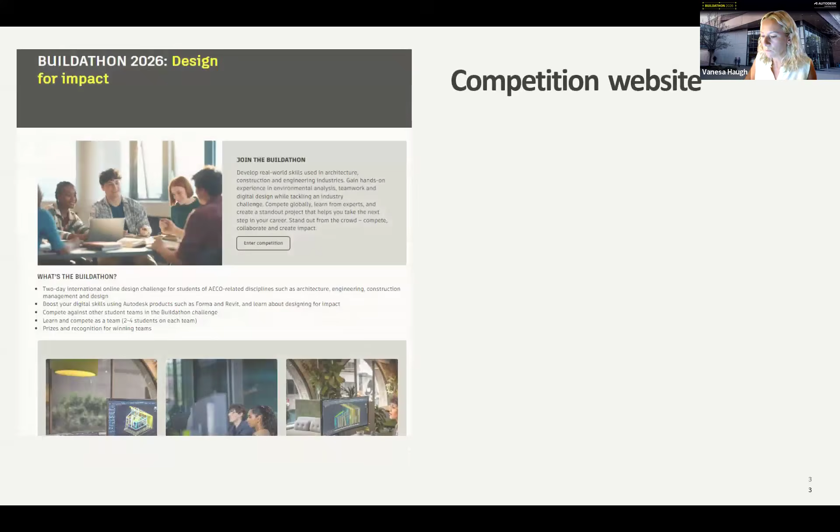To support you in that, we have a designated Buildathon website. This is where you've already registered, but please keep coming back because we have a news section where we're updating news in relation to the Buildathon. We have global training dates posted on a regular basis, and this is the first of quite a few different live sessions. There are different languages happening across the world.

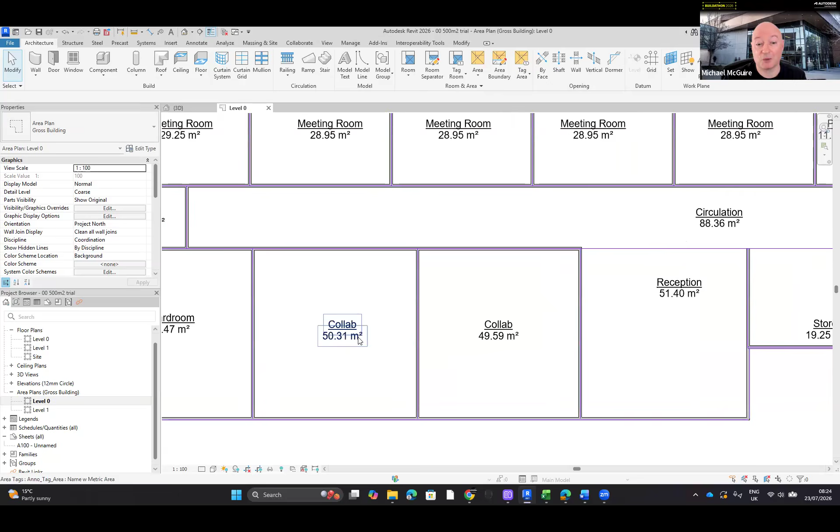I can't fit in any other rooms because it will go bigger than 600 square meters. Each of the spaces that are here must be maximum the space size that you were allowed. So we can start to look at this space here, for example, and say actually the maximum I'm allowed for a collaboration space is 50 square meters. Do you see? So this wouldn't do, okay?

So you are allowed to be smaller than these area sizes that you're given. We can start to work with our models and change the spaces so that they're exactly 50 — that would be perfect. They're allowed to be smaller than 50.

The last tip I'll give before we move on and look at some of the other iterations of how I've developed and shaped some of the spaces: the bigger the building that you can achieve, the more photovoltaic solar energy you can generate. So if you're allowed 600 square meters of a building footprint, you may want to use all 600 square meters as best you can. But what you can't do is leave huge amounts of space that are not being used.

So here, for example, behind the store is about the correct size. But what we can't do is say, well, I want to make the store twice as big, and maybe extend it out to here so it's a nice big building — you can't do that. Each space has to be the size required that's specified in the brief, or smaller.

I will reiterate, this is the part that will probably take the most amount of time. Take your time to figure out the best arrangement for spaces. There are judges who will judge on architectural layout and design. So yes, there are prizes for the best photovoltaic or solar energy, the best daylight, the best response to the site — lots of things to look at — but also how you arrange the spaces.

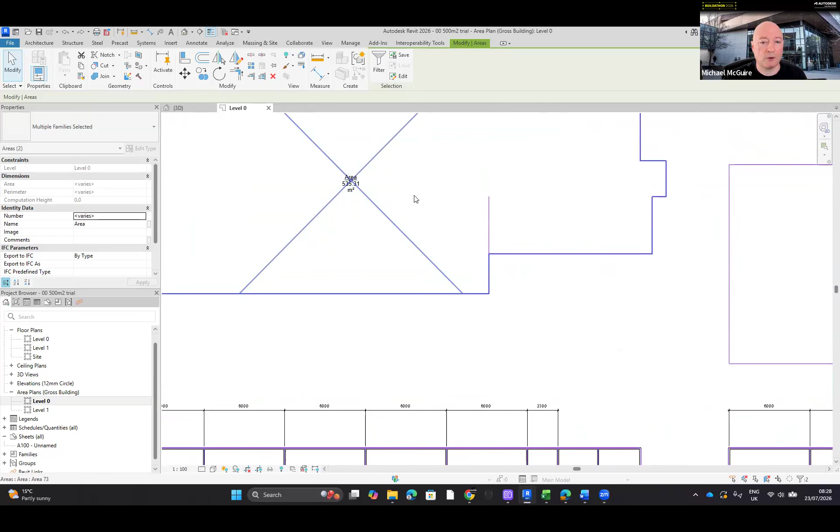You'll notice the other thing I was able to do if I create my concepts like this is I can bring out the perimeter of the building and add and check the area. So if I'm allowed 600 square meters, this building uses 535.31. We can look here, it's 513. We can look here, it's 499.

So we've got less area used on the building footprint on the ground floor. We still have lots more spaces to add, but I thought I'd go over the whole process of how I was tackling something like this, and hopefully if you're new to Revit or haven't used area plans before, that will allow you to follow along and achieve something similar.

Okay, so I won't save. I'm going to start with a completely brand new architectural file, so we'll just go with the default standard template. And there we go - obviously within Revit, we have the ribbon at the top.

Hopefully people are familiar with that, but if not, this is where you're going to find the tools we need. So we've got the architecture tab, we'll be using the wall tool for example, we'll be using the area plan tools that are here in a bit. All of these will open up once we begin the area plan. We have the properties palette here, so if we want to change the properties of anything, and then the project browser.

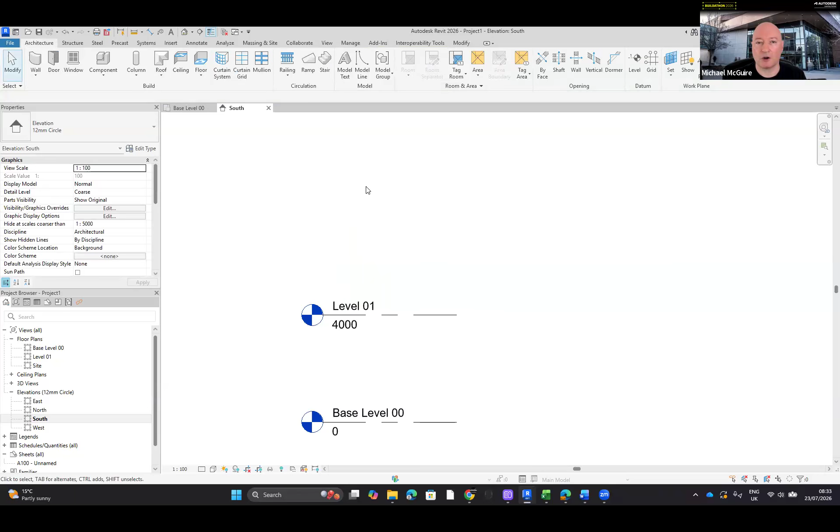If I click on that, my cursor just changed to a little crosshair. If I press escape a minute to show you, my cursor is currently the modify tool, and it's looking for me to click and select something. But if I come back over to datum and click level, then I can create and add new levels myself.

So let's go roughly about here, and you'll notice a little green dashed extension line. If I click when I see that, and then move along to the right-hand side, we'll see that little green dashed extension line again. I can click to drop the level, so we've got level 02.

Revit's very clever in that, because the last one I called level 01, it will call it level 02. It doesn't know that the next one I actually need is going to be the roof, so it thinks it's going to be level 03.

So if we go back and click in this little area here where it's locked with the green extension dash, just one click, not clicking and holding the mouse. And then we can come along to the right-hand side, and again when we see that, we can click.

Then escape twice. I press escape twice because the first time, it stops looking to just create a level, but the level tool remains active. The second escape brings up the modify tool. So we can say level 0, base level, level 1, level 2, and this one, if I click on it one time and then click again, it should be called roof level. There we go, so we can create the levels for the concepts.

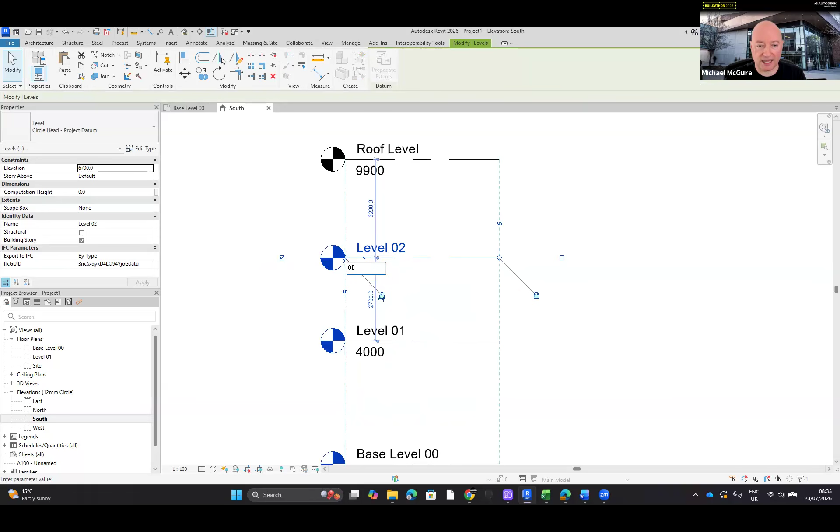If I click on that, instead of clicking to change the name, it's already blue, so I can click to change its elevation height. Maybe we want 8,000. So we've got 4 meters, or do we want the ground level to be 4 meters, but every other level to be 3 maybe? Then we can make it 7 meters.

And then with the roof, we'll say 10 meters, so 10,000. Okay, so we have the base level, level 1, level 2, and a roof level.

But what you'll notice is, hopefully, the base level is blue, level 1 is blue, but level 2 and roof are black and white. That's indicating that they don't yet exist as a floor plan view, so they don't exist in here yet. We can't open the view, we can't actually go in and create anything with it.

So to create that, I'm going to go up onto the ribbon, onto the View tab, onto the Create panel, and you'll see Plan Views. I'll click Plan Views, and you can ask for a floor plan view.

And then here, you'll see the two views. I'm going to hold in Control on my keyboard and select both, which allows me to say OK, and it will create two new views in here.

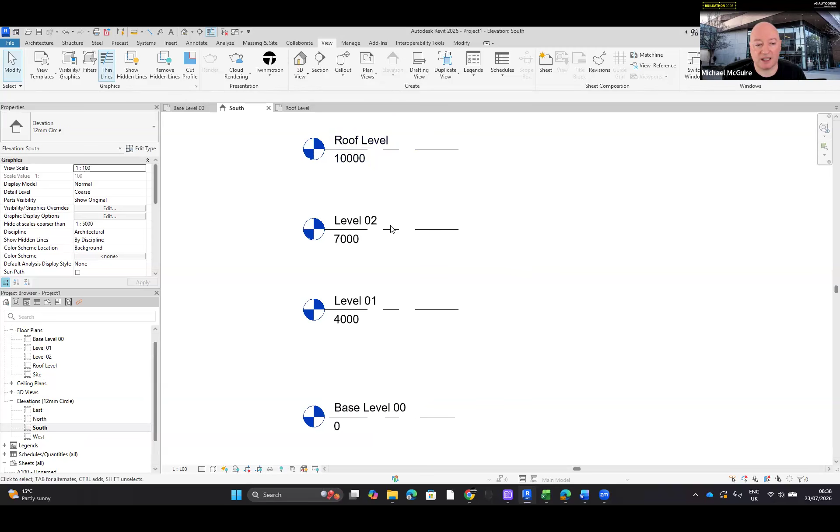To begin creating the concept, once you've worked out some different areas that you want on the ground floor, let's look back at this spreadsheet a second. If I think about how I've done it, I'm starting to think of moving some of these spaces to the ground floor instead of the upper floor. But the reception is in this group, so I obviously want the reception on the ground floor. I might want to put some of the private offices on the ground floor as well. A plant room, I imagine, might go on the ground floor.

It doesn't need to - you can come up with another reason why. But if I put the plant room on the ground floor and so on, once you start to see these totals add up, remember you've also got circulation space. So if I had a limit of 500 square meters, I'm going to say my limit for this is 600, but that will only give me 100 square meters of circulation space - the corridors, the hallways. So try not to get super close to the maximum for each level. How I've divided it up right now, if I make all the rooms the exact size they should be, then I end up with 500 on one level, but only 240 on another level, and maybe 400 square meters on another.

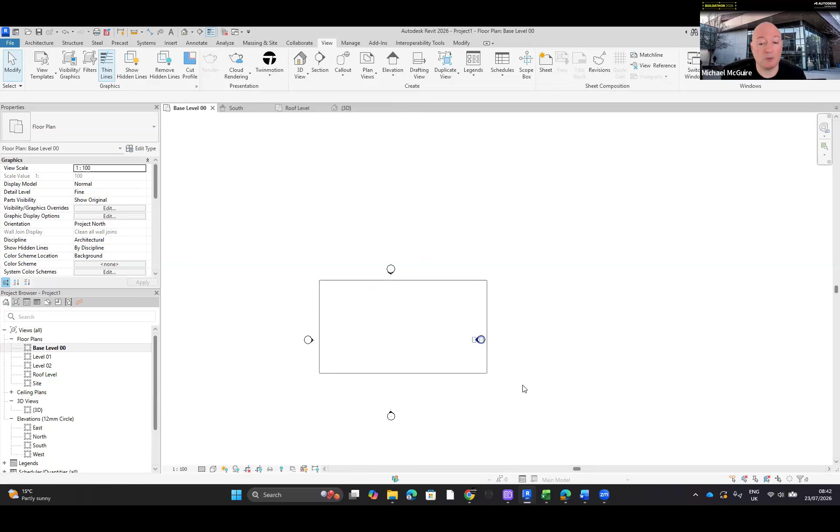So in the floor plans, base level 00, we can double click that. A floor plan view is looking straight down on the building, like a bird's eye view. So we have level 00 open - anything we create right now would be on the ground floor, the base level. If I've completed those rooms and want to create something on another level, I would double click that level, and the view hardly seems to change much, but we're now looking at the level above the ground floor. Or we can open up the roof, whatever that might be. So bear in mind, in your floor plan views, which level you're currently working on. There are a couple of ways to look at this and do this.

This is the way I prefer, and I'm going to show you a couple of methods. You can decide which is better for you. We can start off with creating some walls.

So if we said 500 square meters, for example, I'll do this in two steps. I'm going to do this first and then delete it and show you again why. If I click the wall tool on the architecture tab, build panel, wall, it doesn't matter which walls you use. With this standard template came all of these different types of walls, but it doesn't matter because at this point it's just a concept.

We could even use something like one of the partition walls, or the external wall that has brick on the outside, or one that's purely brick or block work. You can use any of these walls at this point. To keep it simple, I'm not going to use one with lots of different elements like brickwork and plasterboard. I'm going to choose wall external, which is only brick, and attempt this outside this view currently.

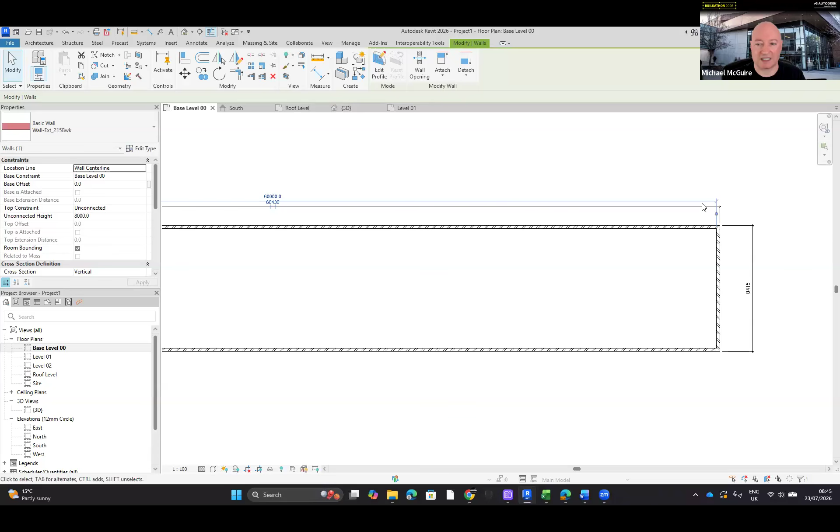So if I choose a wall and edit this dimension to 60 - 60 meters, not 60 millimeters, let's try that again - then we get the 60 meters. If I click here, I can move this one and say 10 meters. So from the outside, 60 meters times 10 meters means this building is 600 square meters. We cannot be bigger than that.

So for this example, I would like to limit you to 600 square meters and be able to add in all of these rooms and circulation. This will be the experiment - this is a good trial.

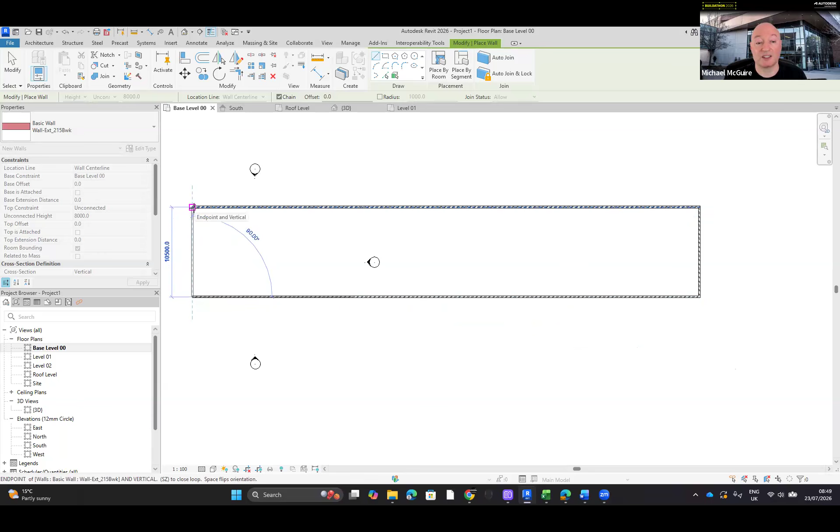Similarly to when we created the levels, a little green dashed extension appears. I can click one time there, and then to finish, I'm going back to where I started and clicking one time. Remember with Revit, you have to press escape twice - once because it's maybe trying to draw a wall, the cursor stays a little crosshair, and I'll press escape a second time.

So we have something roughly like what I would like it to look like. But this little elevation marker is inside the building, hence why I draw this outside normally. What you can do is, as long as you have the modify tool, the little arrow that's there, you can drag over the top of that. If you put your mouse on it, it automatically defaults to move, and you can drag it to the outside of the building where it really should be.

So what about size? How do we check that things are the correct size? Nice and slow so you can follow, whether it's being recorded or you're watching the recording. On the ribbon, on the Annotate tab and the Dimension panel, always use aligned dimension for this. So if we click aligned...

By default, up here will be set to wall center line. So if you measure your building from center to center, and then you changed it to 60, as you see when we drew it, it was 60 meters. The building is actually slightly bigger than that. So when we go to annotate dimension and choose aligned, you might want to use this - choose the wall face. What the wall face allows you to do is dimension from this external face of the building all the way to this external face of the building.

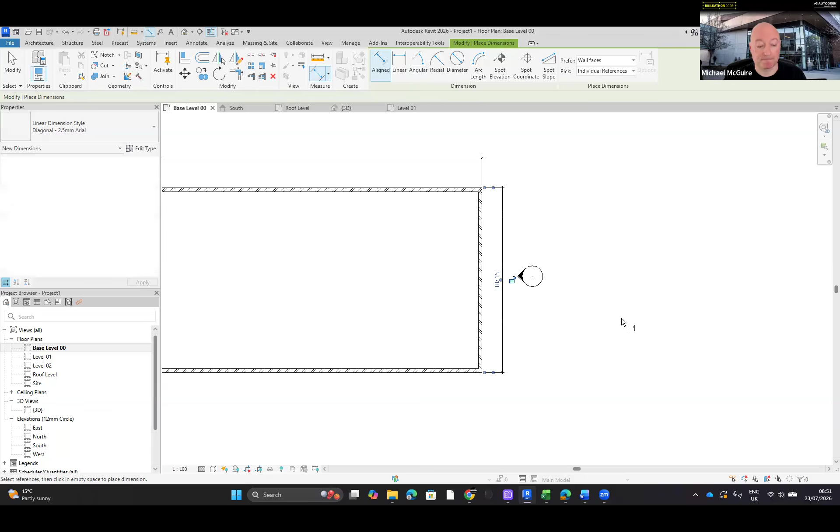So I've clicked those two locations. Now what Revit is asking me is, where do you want to drop the dimension? So a third click is needed to drop the dimension. If I repeat that, you'll notice the dimension tool is still on - it's got a little dimension symbol beside the cursor, and wall faces are still active. So we can choose the exterior two faces, and for the third click, we can drop the dimension. And when you're done, two escapes again.

The number one thing that I find students who are new to Revit do is they try to change this value by clicking on the value. That might happen to you, and if you see this pop up, what you don't do is replace it and change it. What you want to do in Revit - if I zoom out, and we'll change to something like... oh, we went the wrong way. We'll change it to something like 1. There we go, so you can see the dimensions quite clearly on screen. Aesthetically this looks terrible, but just so you can see the dimensions - to make this say 60 meters, you need to move this wall or this wall.

If this dimension is black, it's telling you what the dimension is - it's not editable. But if I select this wall, the dimension turns blue, so we can see that dimension is there. If I click this wall, Revit has been a little bit of an issue - it's showing me a temporary dimension also. So let me just delete this and show you what it's doing.

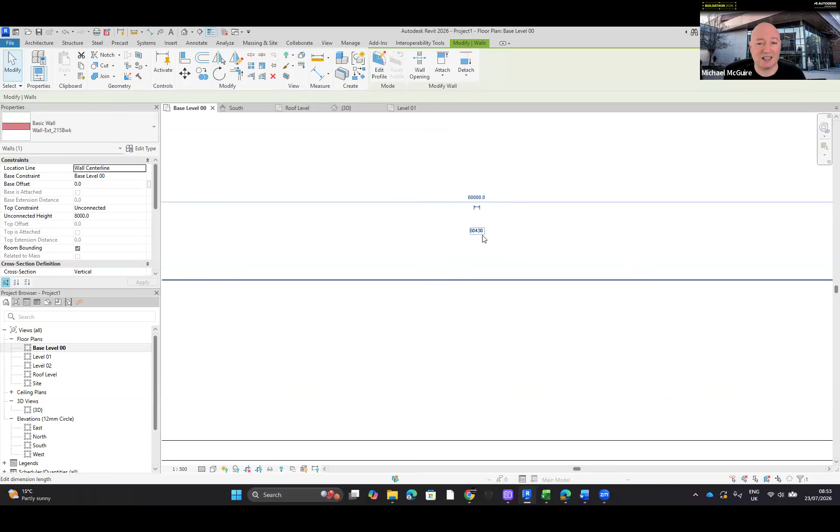So if I click a wall, Revit automatically shows you a little temporary dimension, and you can tell it's temporary with this little symbol that's here. If I bring mine back, it doesn't have that symbol, so it's a permanent or fixed dimension. Be very careful with temporary dimensions, because the temporary dimension is coming from the inside face. So if you make that say 60 meters, the building itself is actually 60 meters, 430 long. Be very careful and make sure you zoom in and click the correct dimension - we'll say 60 meters, so 60,000 millimeters.

And then I want to make this one change as well. Okay, so 10 meters, 715. I want it to say 10 meters. This is the wall that I need to move, or this wall. Those coming from AutoCAD might assume that this is the wall you click, because this is the length in AutoCAD. It would be the length of this wall.

Remember what we did in the dimensions? We made it the dimension from the outside of one face to the other. So what we're doing is actually moving the outside of this face to 10 meters. So if I say 10 meters, now I'll change this back.

Let's change the scale, so the view scale, so that the dimensions and everything look a little bit better. But it's now 60 meters by 10 meters, for example. Okay, so that would be one. That's a good example of it.

Within this space now, you can start to populate your rooms as you have them. Okay, 60 meters by 10 meters might work. You can use a calculator and check what else might give me. So if we said 50 meters, what depth might that allow me to have? And so on.

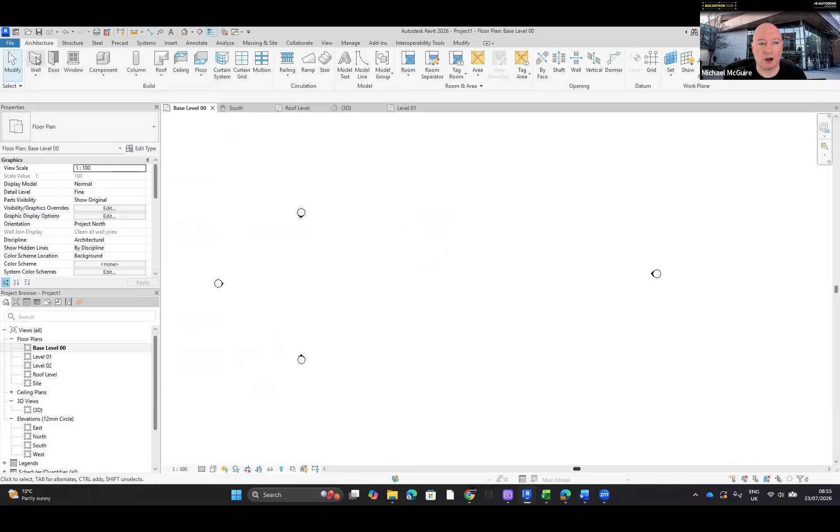Okay, so here's how I would tackle that. So we've already got our elevation set up, and we now know how to draw in some walls and how to add some dimensions, so we might start. So, architecture, we'll look to the build panel and we'll say wall. And then let's, instead of saying exactly that footprint, I've already worked out what my spaces might be in this spreadsheet here.

Okay, so I think I need a reception that's 7 meters by 7 meters. I need 5 breakout rooms. They are 5 meters by 6 meters approximately, and so on and so on.

Okay, so I'm going to try and recreate them as that little sketch that I've created. And then one of your challenges as you practice might be to make a better space than me. How's that? See if we can make a better space than what I make here right today. So we've got these little breakout spaces.

So we start with these. We'll say, I had in my head, as this space worked, I had something like this. Okay, so when I was thinking of this and I sketched it out, I was thinking of maybe some meeting rooms along here. So a reception in this area, a corridor hallway, as you saw.

So we'll go 1, 2, 3. I think we had 5 meeting rooms that we need. So if I thought of putting them all together, 1, 2, 3, 4, 5. So there are those meeting rooms. We're going to have something like a staircase at this end. Possibly, if it fits, we want a boardroom here.

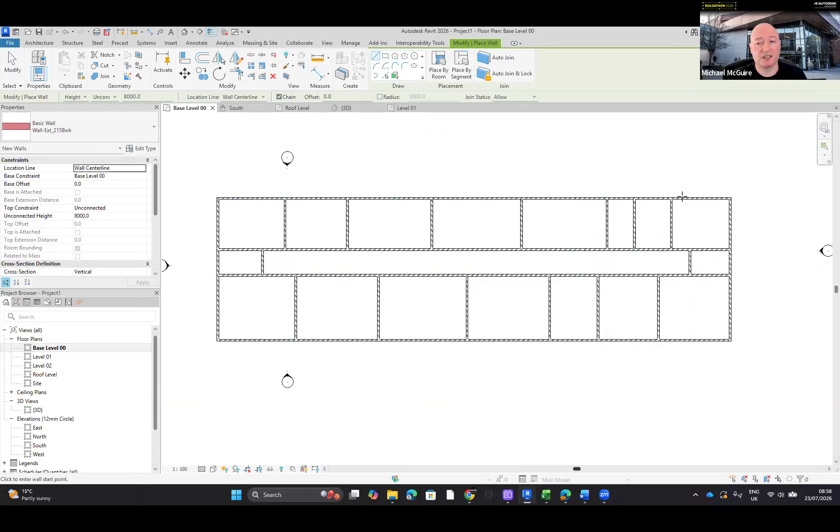We have 2 things to work out. One is going to be the perimeter, the area of the building, the overall area of the building, but we also want to work out the area of each of the spaces. So if we get that correct on the left and we work along, what you'll remember from my sketch is this looked, it kind of stepped in a little bit around the building here. So we might need to change some of that, how it fits around this area here. Okay, and the way we check that is we'll end up creating something of an area plan.

This is my idea of how it will work. I'm thinking already of daylight coming in from all of the spaces. What I haven't created is a room here, because you won't get any daylight into this space. So I'm already thinking of big windows, lots of daylight.

Maybe on the south, if you're in a warm country, you don't want huge big windows. Being in Scotland, I would quite like large windows here on the south, lots of light coming in.

Something else that's maybe not great design would be a corridor that goes to nowhere. This costs a lot of money to build. We have a corridor here, and then maybe it's an escape entrance. This would work. But what if we have a staircase, and we have a door here going in and a door coming in here and so on? So these might work as spaces for me.

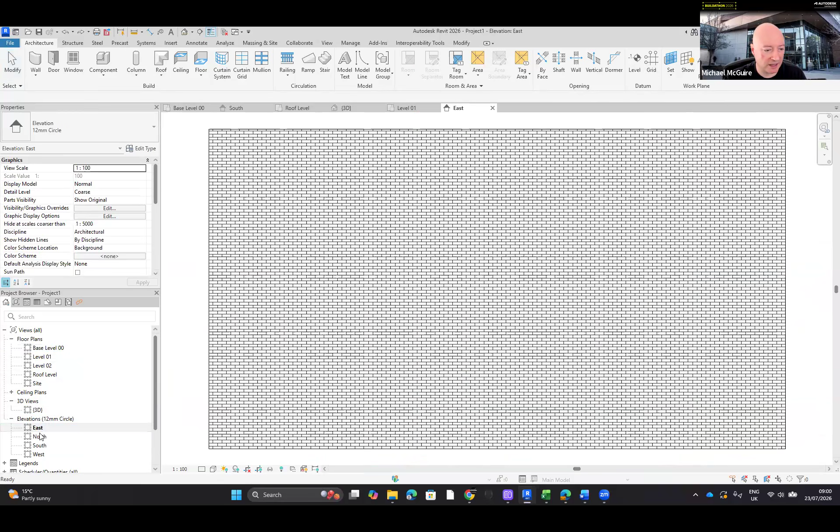We can go back to the level, and go to the elevations. Let's go to south. There we go, and we can see that the building currently is too high. We'll deal with that. It's way too high - it should only go up to level 1 that's here.

Back to that 3D view. What we want to do is pick up all of the walls we have created so far. So we can pick up one, and then if I right click on that, I can select all instances, either in the view, everything I can see, or the project. You'll notice it picks up all of the walls that are here.

This is where the properties help. We have a location, which is the base constraint, on level 00, where we thought it should be. The top is unconstrained and 8 meters high. So what we want to say is the top of these walls should go to the level above that we're currently working on - so level 1.

Then say apply, and now this is the ground floor - or it might be the ground floor, we'll see if it fits. Going back to our base level, we can see how that might look. I would be really happy with that, but what we haven't done is check the area of that.

Something to pay attention to in your views is there's a type of view missing until you tell Revit that you want to do it. This is going to be called an area plan. We can look at the ribbon, the architecture tab, room and area, and then this little drop down for area, we can tell it we want to create an area plan. Then it asks which views you want an area plan for. You can select all of the views and say OK.

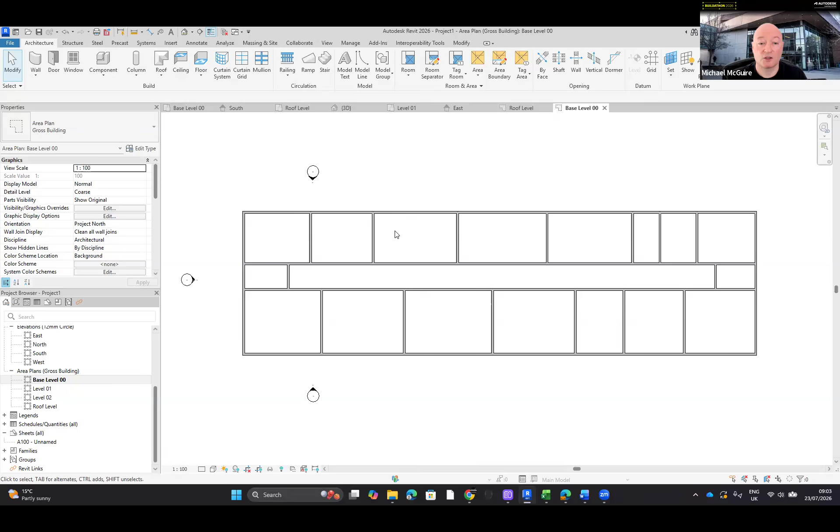I've now got a new section. Where before we were working in the floor plans, we can see that here - I've now got a new section called area plans. If we open up the base level, we should see our building that we already created. So anything I do to this building here, if I edit the walls, will also happen in this view and will also happen in this view. If I deleted this wall, it will delete from all of the views. But something really special the area plans show that the other views don't are the areas of your building.

So let's create them - let's start with them. We've already created the area plan. To create an area, we need to define what a boundary might be.

So if I click area boundary, there are two ways to do this. You can automatically click on a wall and it will select the middle of the wall. That's fine if you want to do that. You'll see that the area boundary sits in the middle of the wall. If I undo that, another way to do it is by using the sketch and draw tools that are here.

So you can create it using something like the rectangle tool, and if we zoom in, we can click exactly the right space. I'll just change this little setting, the thin line setting, so that you can see that on the screen. That defines the area of that room.

So I can now add in, if I go and click here, area, and I choose area, then I can add an area to that space. You notice I can't add an area to any other space, right?

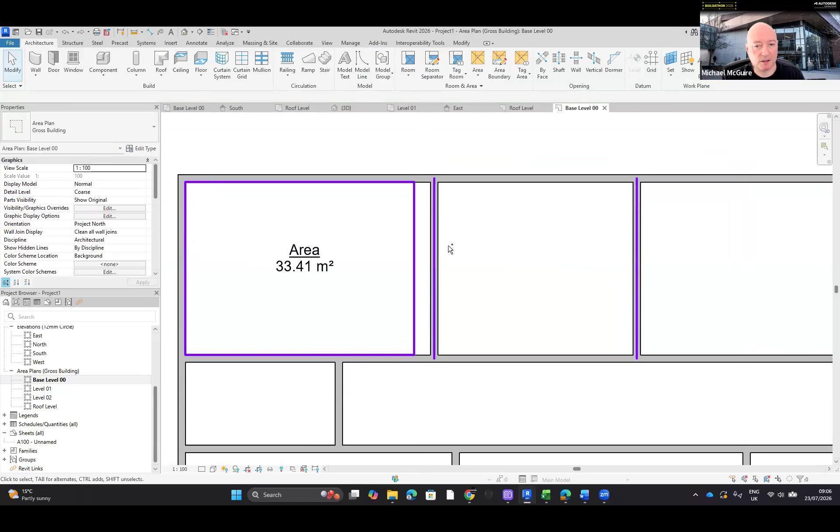So you have a choice of how you're going to attempt to create your spaces. We can look at moving with just a click on the boundary. So if I click that boundary, I can move it until it gets to 30 meters or just under, and then we can start to bring the walls across to where they meet.

To align different tools, we'll notice on the ribbon, if I select something, it changes to the Modify tab, and here is the Align button. I'll click Align, and I'll click maybe this area boundary, and then the face of the wall, and the wall will move. So the first thing you click is going to actually stay where it should be. So you can see how that works.

I might delete that, and we'll try that again. So just to show you why I might like to use the draw it yourself method - so when we go to area boundary...

I've got it set on the pick lines tool, so we can pick all of these lines as we go along. We'll pick this one, we'll do along here. Okay, so we've still got these ones to do on the outside here.

I might like to draw these ones in myself because what I don't want is to draw in the middle of the wall. I would like to draw on the outside of the wall because the outside is actually my building footprint. So using that rectangle tool, the little sketch that's there, I know that I've drawn on the outside of that.

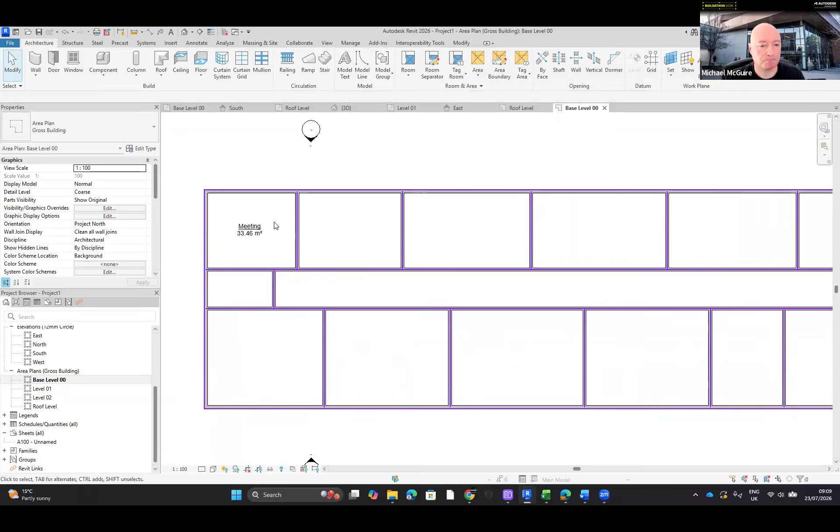So for here, if I click the same as the level, if I click on it once and then click on its name, we can call it meeting - so this is going to be one of the meeting rooms, for example. And then we'll click area, and I'll choose area, and we can start to position them all in here. So let's pick that meeting area, so we can position each of these this way.

You'll notice everything is going yellow. What you should not have in any of your building is any empty space like that. So we need an area, and we need to name it and tell it what it might be.

So if I was to name each of these spaces, it's a meeting room, it's a meeting room. You can call it meeting 1, meeting 2, meeting 3, meeting 4, meeting 5 if you really want, or you can put in the room numbers. These others for me were going to be something like a print room, a server, and then a couple of offices that I needed. This was the staircase, we've got circulation, it's here. This was the other office.

So there were 3 offices and 5 meeting rooms in this spreadsheet as I had it. So from my sketch, this would be the reception. We had a collaboration or an open space, an open space. And then along here I had a boardroom, and then the other stair.

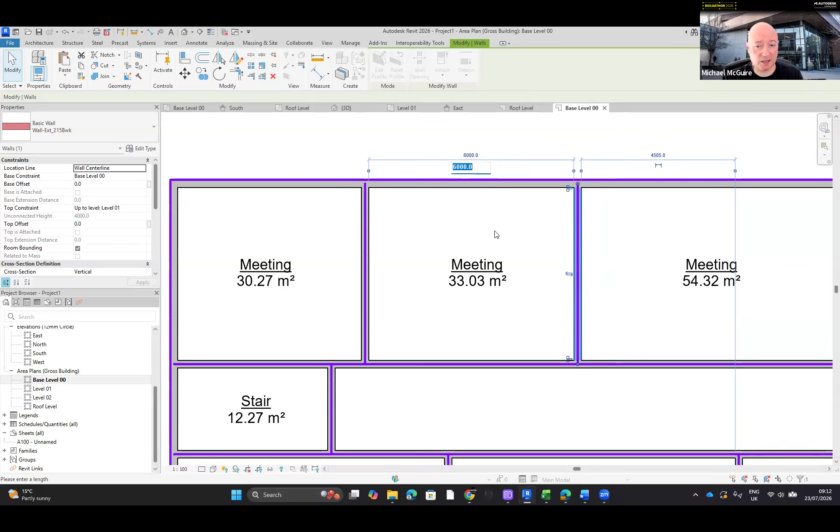This is much easier to do it this way, because if you move the wall, it automatically changes the boundary, as we see. The other way I was showing you to do it - I'm just going to delete a couple of these boundaries a minute - is if you do the area boundary and you draw the space exactly in the room yourself, you get the area exactly the size of that room.

So if we pick this up, I'm going to delete that little boundary it didn't like, and I'm just going to start to create them myself. So area boundary, I'll choose the rectangle tool and draw that in exactly myself. If you want to do it that way, I recommend that you add dimensions.

Exactly as we did before, on the ribbon in the Annotate tab and the Dimension panel, aligned, and make sure we've got wall faces. But what you want to dimension is the inside of the room. So if you know that you want a room 7 meters, we'll click this wall and make this 7 meters. Or if you know it's going to be 6 meters this way, but this way should be 7 - you see, if I click this wall and change this to 7 meters, then that wall changes.

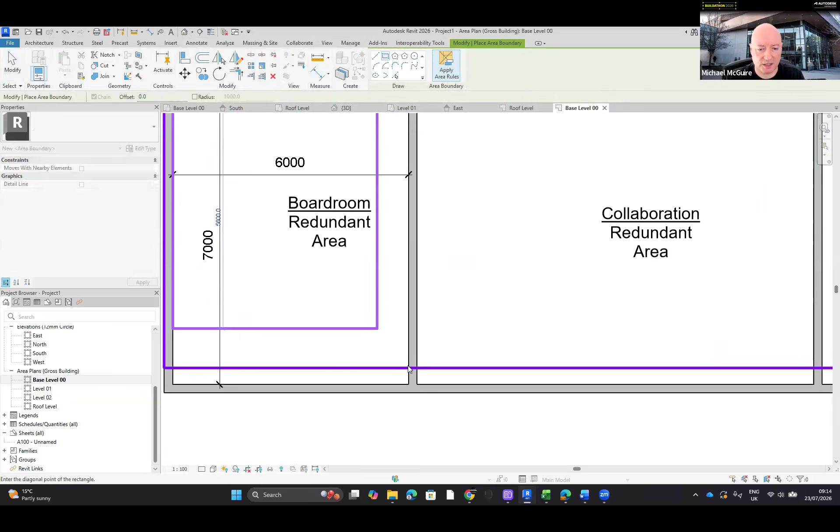I'll go back through then and we'll just add an area boundary into this space, and then this space, and we need to fix the ones that are there. So you can see how that would take a bit more time. I don't need this one, for example, that's here - we can bring that along to here just now, and I would fix all of these spaces that are now going to be broken. We'd need to go along and fix each of them as well.

So that's how you work out your concepts. Once you have each of the rooms the size you need them to be - if we're looking for 30 meters, I'll just very roughly do this. This might be an early trial at a concept, so 30, 30. Let's bring these along to where they might sit.

So no spaces can be bigger than 30 meters. We'll allow a tiny little tolerance, but if this is just a trial and an early concept design trial for me, I'm going to pick up each of the walls and just move them so that the spaces are approximately the right size at this point.

Once you have all of the spaces the right size, we've got quite a big bit of space over here as well, this huge big meeting space. But once you have all of the spaces the right size, what you'll start to find is down here, it won't work perfectly.

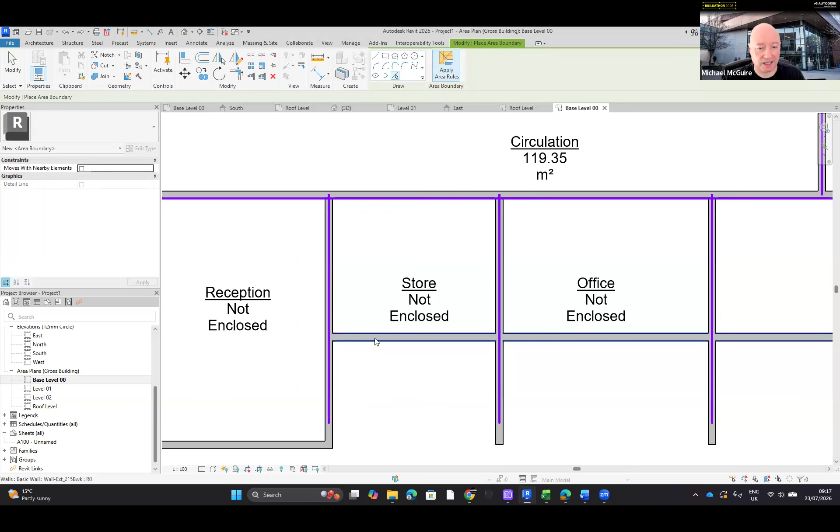So if we change that and pick this wall, it now knows that this is a boundary for this area here.

So again, checking your spreadsheet, looking at what sizes everything needs to be. If these are the correct size, great. If it's too big, then you'll need to reduce the size. However we need to do that.

Same, I'm going to pick up - need to hit escape, I'm putting too many boundaries on. There we go. So we'll pick up this wall and the little blue dot, we'll move that one back. This wall, the little blue dot, and move that one back.

I'll show you why. If we go to 3D, so we'll look at 3D in here. Currently, as the building stands, we've drawn too tall, but we've got these fins to the side of the building that we're not needing. These are not outside rooms, so we need to fix that.

And all we're going to do is drag these back. So a nice, early, very rough concept, okay? Once you have those very early rough concepts, you can start to look at the dimensions of the building overall. We've got these to fix as well.

Yep, there we go. And we can do the same with the boundary as well, so you'll notice if you select it, you can just move it back. We've got a little spare extra one in there I can delete. Region not enclosed, so we still have some boundary we need along here. So if we do each individual room, or we just drag these along, however it might work.

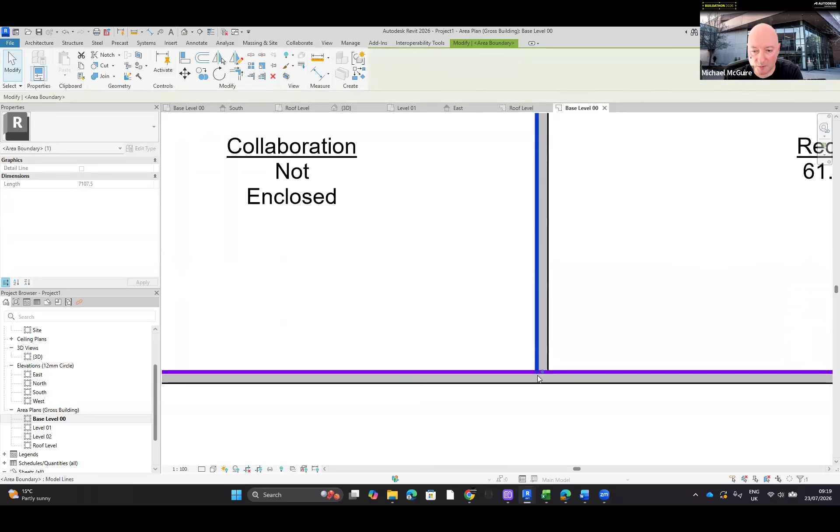So it must be here. Not enclosed, that one's the wrong one. There we go, so let me just add that. Oh, it's not picked up that space.

So what we might end up doing with this space in here, we can look to - let's go find, so we've got the boardroom, we've got the collaboration, so it must be along the top somewhere, there'll be a little gap or something. So we can delete that and then just re-add that in.

So area boundary, pick up the spaces. Oh, it hasn't done it. Let's do it manually then, because I dragged this one along, I think, just trying to cut some time.

So we'll do architecture, area boundary, and it's just a little sketch of the room. So we just draw in and delete this one first. What we can't have is any of these boundary lines sitting in exactly the same place. There we go, there's that reception as well.

So what I can't do - we can pick the inside of the wall here, but what you shouldn't do is put two on top of each other that run parallel to each other. So we can do that. There we go, and then the same thing for the storeroom and some of the other rooms that are there as well.

So just pick the inside corner and the inside corner, and do that for each of the spaces that say they're not enclosed. There's two ways to do it, whichever suits you better: you either draw in each of the rectangles yourself, or you automatically select them using the Pick Lines tool.

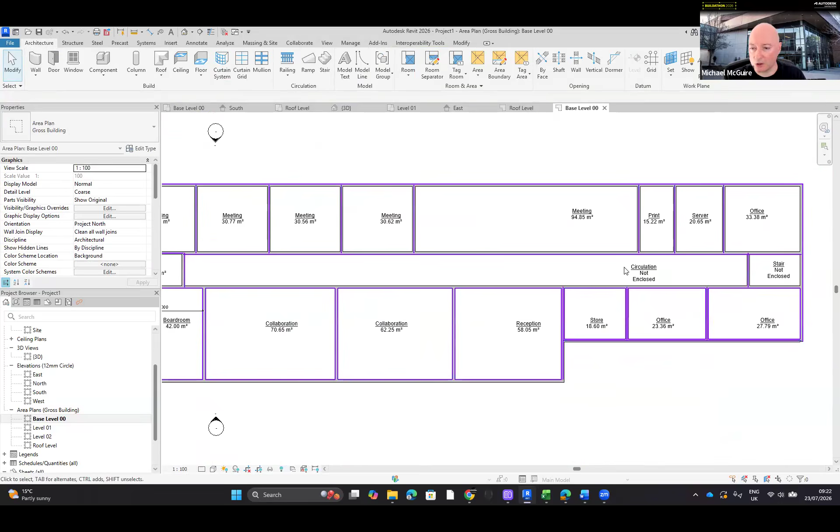Let's go with that. We'll get a little error telling me we've got lots of overlap. Yeah, we've got 110 square meters of just circulation space.

So if I bring the reception up and into here, that might actually help reduce that. That's why I was saying don't get too bogged down with making everything exactly perfect right now. Just work away and make things a little bit more conceptual at this point.

Once we bring the reception in, if we find out then, I'll just change a little bit of that space. So if the reception came into here and along, we'll bring this up. It changed to 638. Maybe there's something else we can do.

Those are the maximum room sizes that we're allowed. What if we moved some of them to the upstairs? So if we moved a couple of the meeting rooms upstairs, then it would maybe look something like this, right? So we can bring that along, bring this down.

So now we've got 595 square meters. So that's within the building footprint.

What you have to be very aware of is if that's the building footprint downstairs, what you can't then do is overhang. If you're using all of the space, you can't then upstairs make a building that sits like this, right? Because then you've got some new space.

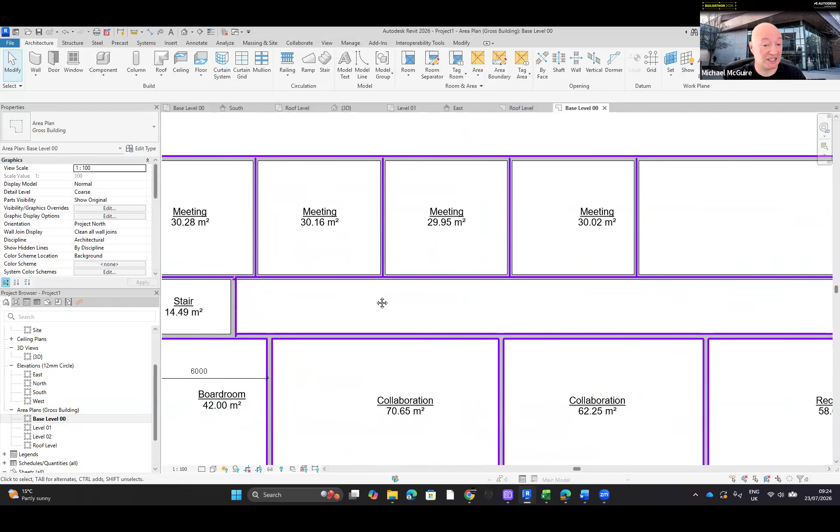So if you were happy with that, and you have this as a concept, that's as far as we need to go here. However, if you wanted to and you're in Teams, somebody now works on it in Forma. I just wanted to show you just quickly this. We'll have a break after I show you this part, and then we'll look at Forma.

But on the architecture tab, you have on the build panel, doors and windows. So if you want to go further, bearing in mind that some aesthetics are judged, if you create a floor plan showing doors and how everything flows, for example.

So if we have these doors coming into the meeting rooms, the stairs, however that might go, the boardroom and so on, what you're actually showing is a little bit of thought and showing that the spaces do work.

So yes, there is enough space to put a door into the boardroom here. Is there enough space here? No. So you see, while we think we've got everything absolutely perfect and sorted, we haven't left enough space for a door to actually get into this meeting room. If we remove that meeting room, then that's not a problem. But make sure that you have enough space to get doors into every room, however that might be.

Okay, so maybe even if it is a door into the print room and then a door from the print room into the server, however that might work.

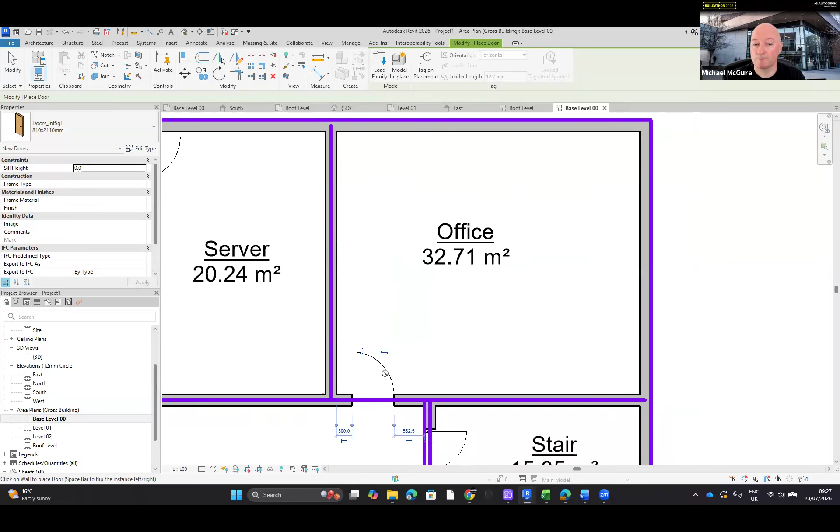So we can think about how the door swing might work for each of the spaces, if it's a public or a private space or however that might be. Should that door be located here, or should it be located here, closer to the wall? And how does that affect the flow of the space, etc.?

So this is something we're saying is not absolutely required. But if you want to spend time on it, if you have a team and somebody's really strong in Revit and you want to work on that, you're more than welcome to. It might get you some bonus points in terms of aesthetics or architectural judgment.

There's also the window tool, with the preloaded windows that are there. Then think of each of the spaces - does the server room require a window? Does the print room require a window? Does the office require a window? Does it need multiple? Are they going to be on the north, are they going to be on the east?

What happens with the light on the east? What happens with the light on the north? Should there be windows into the stairwell? And then at what height would they be, for example? So we can look at some of that.

Do we want a window on the east for this office and lots on the south? Or is this going to be in a really warm climate? Do we even know the orientation yet of the building? Is it going to sit east to west, or might it end up sitting on the site north to south? We don't know - I don't know, you can tell me. And then where each of the doors and windows go and so on can fit within there.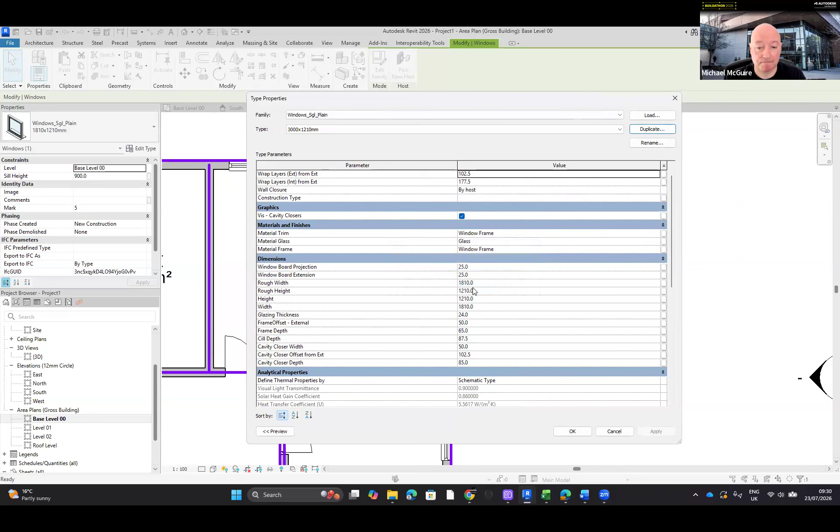And we'll say OK to that. So instead of the 1810 width, let's change it to 3000. And if I say OK, I get a little error. It's telling me that the window is clashing in here. But all I need to do is move that up.

So we now have a new window that, when I click window, is 3 meters long. If I would like to use that in any other rooms, we can add that 3 meter long window.

So the process for me would be, very roughly, get the spaces into the correct sequence and order. Then we can think about those perimeter areas and how that might work or not. And if it's going to work, then you can start to look at the sizes of the windows, the doors, or the rooms, and make sure everything is absolutely perfect.

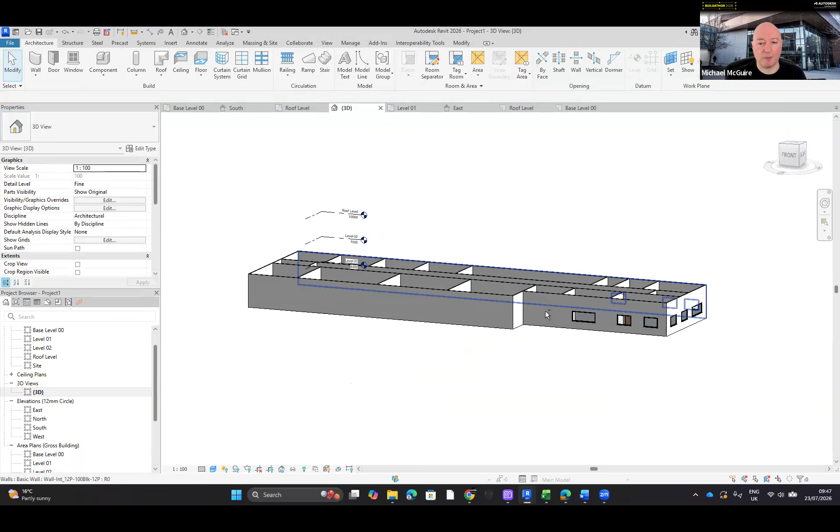And then in the type selector, if you choose a different type - so this is an internal wall, but it's going to look better on the screen, right? A little bit more aesthetic, yeah? A little white box, if you like.

Another way to do that, instead of picking up one and then right-clicking and choosing Select All, is putting your mouse up in this area here. If I hold in my left mouse button, do you see it's creating a little selection window? And if you go left to right or right to left, the window is different. If we go right to left, anything that touches this window or anything that's inside it will be selected. If we go left to right, it's only anything that's fully within inside the window, not if it touches it. So you'll notice it has a continuous boundary line versus going right to left, it has a dashed boundary line.

But either way, if I select everything in the screen, I've got multiple things selected. What I want to do, up on the top of the screen, is use filter. And I only want the walls. So what I'll do is deselect the doors, the levels, the windows. Only the walls are selected. We can say OK. And then, because we've only got the walls selected, we can change to a different type. And then either click in the screen or hit escape to deselect everything.

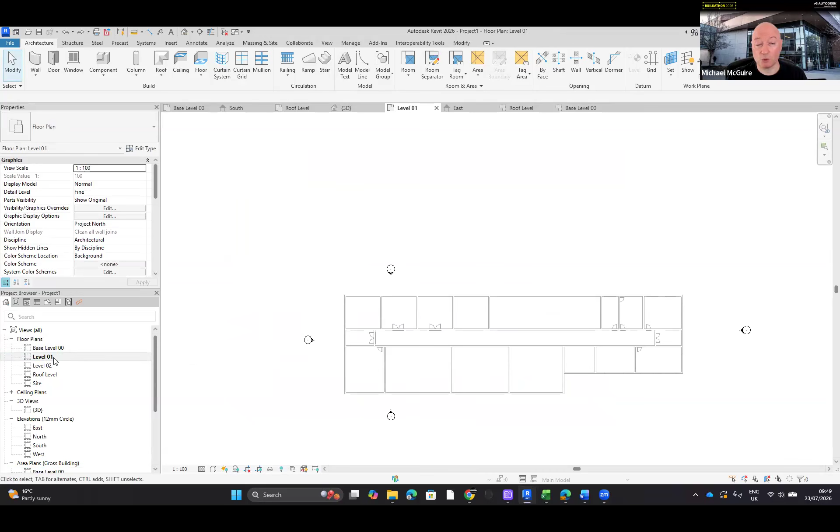If we want to work up a level, we need to look at that as the floor plan for the base level, and we'll use the same type of wall. But if we look at level 01, what you can see currently by going to level 01, so we're on the next level up, that first floor level, you can see the building down below.

Now, a lot of times, depending on the installation, you might not see that. So to show you how to switch that on and off, personally I quite like that to be on up to a point, then I'll switch it off. In the view properties, as long as you have nothing selected—escape twice to ensure that—when you scroll down, you'll see a section called underlay.

Think of it like a piece of tracing paper, a piece of film. The range base level is level 00. That's what you can see—you can see the ground floor level. If you set that to none, then it all disappears.

Only visually. So in the floor plan 00, you can still see that building. It also does exist in 3D. And if you go to 00, you can see it in floor plan. But now if you go to level 1, you cannot see it.

The reason I like to see it is I'm going to need it for the perimeter of the building. I don't want to make this floor bigger than the floor below, because the floor below is already at its maximum size I'm going to be allowed.

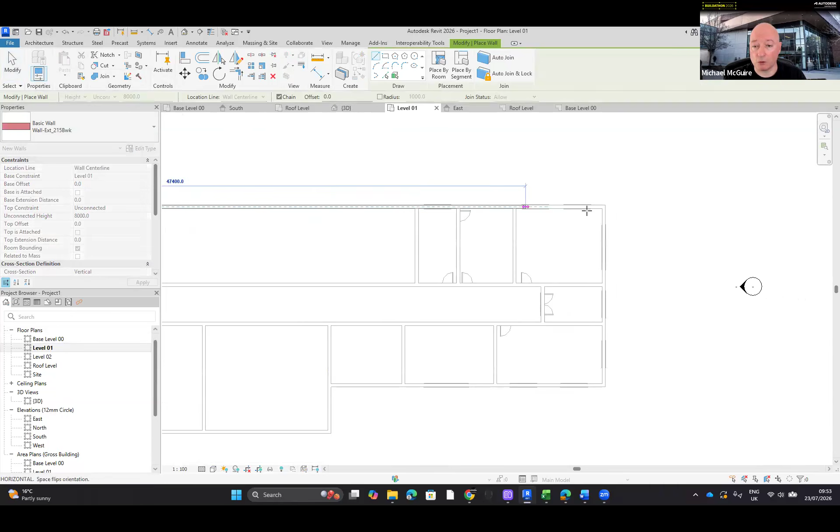We can see the ground floor plan level. I'm going to click wall, zoom in, go to the middle of this wall, click, and start to draw. So if we know this was okay for size, I can just trace around the outside of the existing ground floor level.

Let me zoom in a bit—sometimes you need to zoom in quite close. And then we'll pick that up, and then back to the beginning.

Okay, so I didn't fix the height. So if we go now to look at that in 3D, we will see, yep, we have the perimeter all drawn in, but it is way too high. We can see that it's way too high.

So to fix that can sometimes be quite a bit of work. If I use Control, I have to go and select all of them and then fix that in here like I showed you before—we'll say go up to level 2, to fix this.

So if the ground floor level is exactly the size it needs to be, we can't make this bigger. So what we can't really do, if I go to the correct level, is overhang this like so. We can't have any overhangs or cantilevers, because the ground floor level might already be exactly the right size.

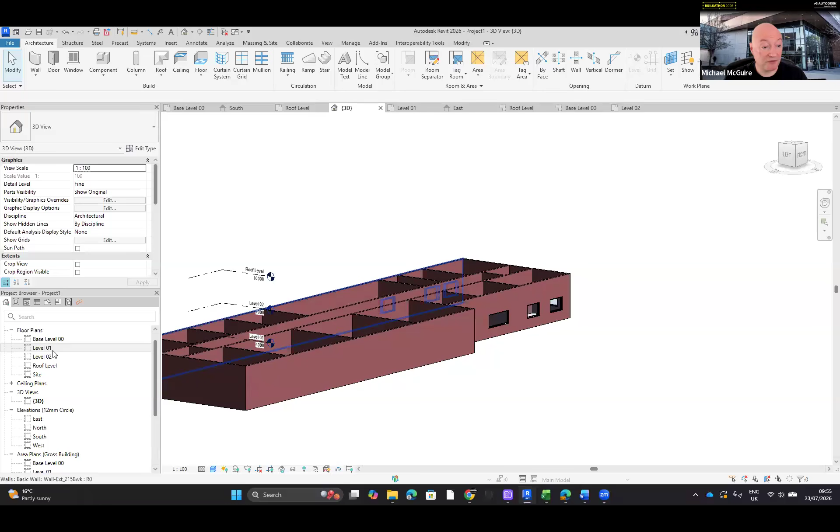To fix that, let me do it using best practice this time. I'm going to click wall, and either in the options bar or up at the top of the wall, I want to pick the next level up. We're on level 1, that's the base of the wall, so the top of the wall should go to level 2. Then I don't need to fix it.

So if we come in here and click to start, I'll just pan along, and we can click that midpoint, then the same around here.

Again, this is going to be our early concept for the upstairs. This doesn't mean that by drawing this shape, we'll be able to keep it exactly this size or shape. It might end up being smaller, but it can't be larger. So if we come into here, I have one more to draw, which goes back to here, and when I click here, it closes up the little gap. I've now got all of the upstairs exterior walls drawn.

So it would look something like this, if it was exactly the same upstairs as the downstairs level. But it can't always be.

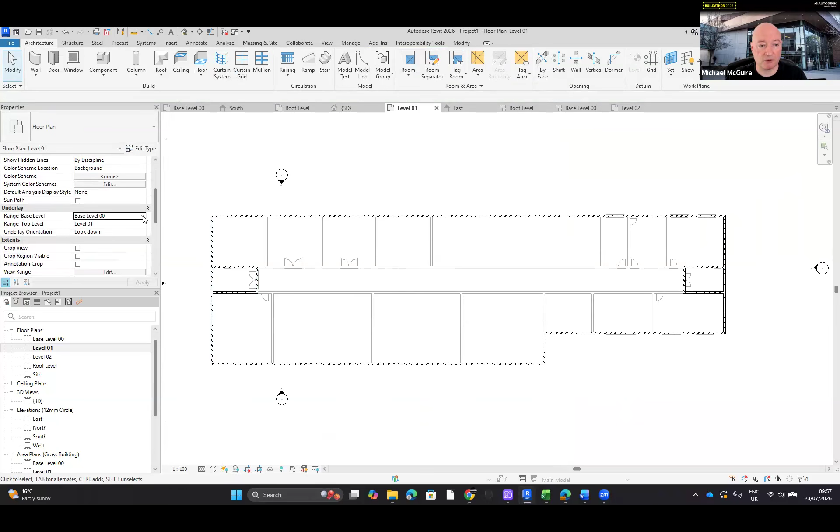So what I'm now going to do is go to that underlay, range base level, and make it say none. Now when I move my mouse, I can only see all of the walls where I think they might need to be for this level.

So we're at the upstairs level right now. We've got a staircase, it needs to stay in that area, and then we have some other spaces we need to fit in.

Going back through the same process, we could go to level 1 in the area plans, and we can start to create area boundaries or walls. We might put some WC, some toilets, around about these spaces.

I was thinking, if I bring this spreadsheet back in, for this space, I'm thinking just a 400 square meter open plan office. I thought 20 meters by 20 meters, but I can't do that because the building is not 20 meters deep. So I'm going to try and fit in something like a 400 square meter space here.

What might end up happening is that this space here, there we go, it might end up sitting closer like this, right? We might not need just as much space upstairs as we've used downstairs.

What you can have is spaces like this, so the downstairs takes up more footprint than the upstairs. If the downstairs is taking up that 500 or 600 square meters or whatever your limit is, the upstairs can be smaller. It can't be bigger, it can't overhang. We couldn't have it the other way, with the upstairs overhanging like this. When we look down from above, the absolute outside of your whole building should be no bigger than whatever the limit is going to be in the brief.

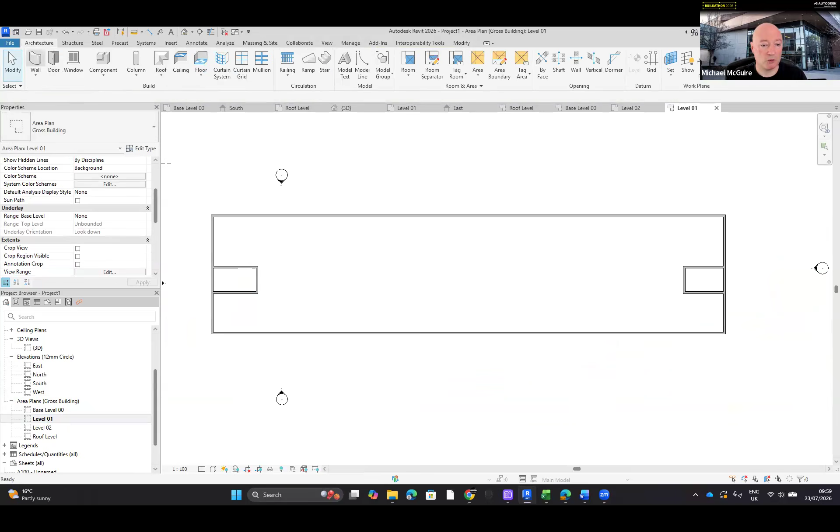And then in this space, we can try to fit in, using the walls, maybe some WC here, whatever it might be, open seating, other spaces, maybe a meeting room, and then a big meeting space. If I needed to, what about something like this, right?

So that little blue dot, we can bring this back. Oh, I've deleted one, I didn't mean to delete that wall, I meant to bring that back. We obviously need the stairs, so I need the stairs to stay, but maybe once I add in the space, the area, we can look at that. So we'll say area boundary, and we'll pick these.

So I'm doing it a nice quick way, and then we can start to add in those areas. If I pick area - oh, 400 is the maximum it's allowed to be. That's a pretty big space. Once I add in some WC in here - I think the spreadsheet said we had to have some WC spaces, maybe 3 per floor, for example.

So again I'd try to get that as close as I can to 400 square meters as I'm allowed. So maybe this wall here, instead of being aligned to the stairs, comes down and along here. I'm just trying to think what I wouldn't do. Let's see.

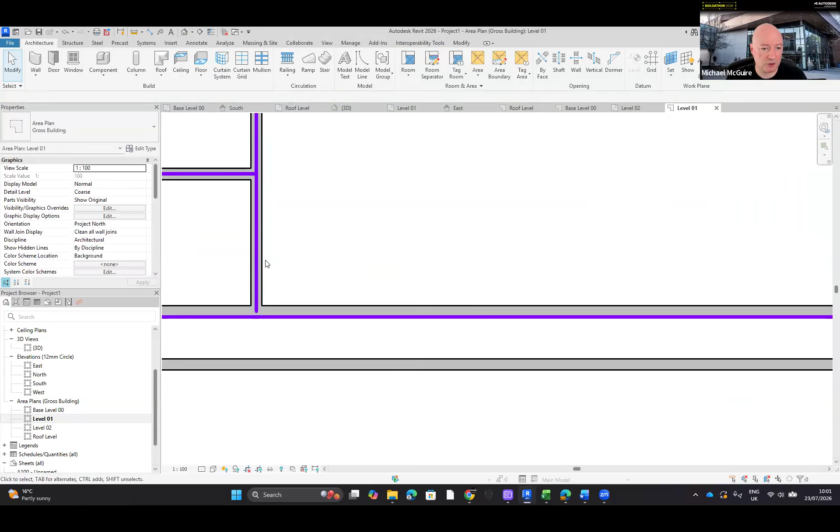Yep, like this. Okay, so if I try that, we'll pick up this wall and extend it a little bit. This wall here I'm going to bring back to here. And this wall, I don't necessarily need it to be all the way across - it can be the stair at the other side only. There we go.

And then I need to redo - let's see, we've got the stair. Yep, we've got this. I don't need any of these walls down here. Don't need any of these. Oh, we did need that one, but then we don't need that. We can pick the area boundary. There we go - so currently it's 421.

Once I create - if we're doing little WC spaces in here, for example, it's going to end up about 400 square meters. So you see how I changed that space? It's not coming all the way out to here, if we look at it in 3D. It's not coming all the way out to here, so it's stepped back. But it's about 400 square meters - as big as I can make it, trying to get that space as close as I can.

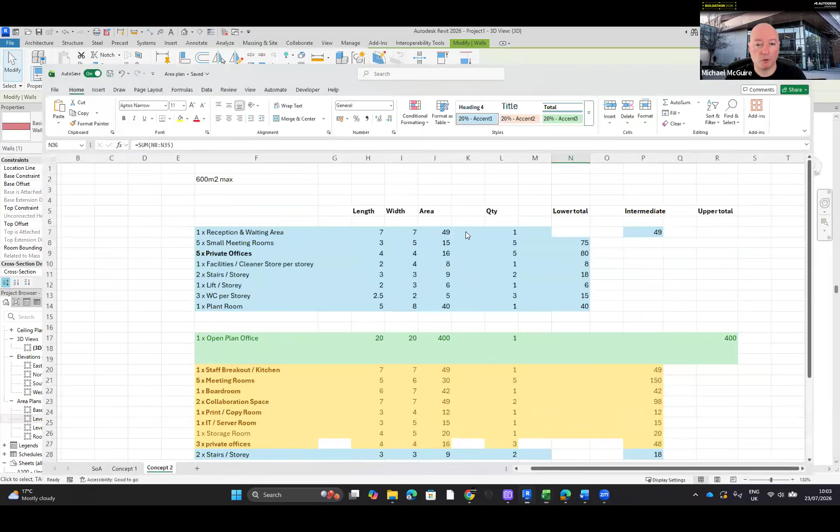And then finally, what we'd end up looking at is what we're going to put on the top floor, right? So the top floor ends up maybe only 242 square meters. It's got some rooms, but not a lot of them. So maybe on the top floor we end up creating something only half this size.

Okay, so how that might work then, if we try something like that again - we can look at level 2 this time. And then what I did was go back over the same steps, which is good. We can look at it in the view, making sure to hit escape twice - I hadn't hit escape twice.

As we scroll down, we'll see the range base level underlay. So we're on level 2, and I want to see level 1. And there we go - so there's what level 1 might look like. And then I think I'm only maybe wanting half of this space up here.

So we can click wall and check that the height is going to the next level. We're on level 2, and the next level is called roof. Then we can start to draw in - let's just guess that we only want about half of it this time.

And you'll notice I've been using Revit for a long time, and I still have to zoom in and out. It works pretty well if you zoom in and zoom out when you need to - make sure if you're trying to click somewhere, you zoom in as close as you can. So let's say this is what it's going to look like on the top floor.

Might a different concept work differently? Yes - had I not made so many spaces on the ground floor, maybe it would be a lot squarer or cube-like. Then that would also work. This is the whole point of doing multiple concepts.

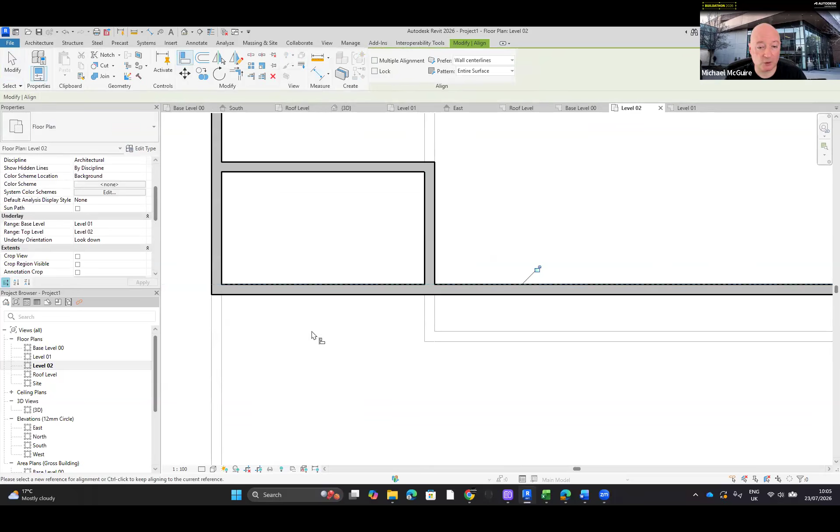Remember, the second one you click is the one that's going to move. So the upstairs space becomes something like this.

Do we need 2 staircases? Is it only 1 staircase? Think if you want to go like this, why? If you need 2, then maybe this one here must be in the middle of the building, for example. Okay, so maybe the staircase out there doesn't work. Maybe in your concepts you want to investigate having a staircase here that goes all the way through the building and not here, for example. Okay, and then it's the same.

So now we have that. We don't then need, if we scroll, I'm scrolling too far down. We don't then need to see the next level below, and we need to work on the area plan for that. So we'd be level 2.

And then area boundary. So again, it's exactly the same thing. Once you figure it out on one of the levels, you can repeat that for each of the levels. We've got all of the boundaries, and then you can start to add in whatever the areas might be.

Okay, so whatever the areas might be for multiple offices, etc. for here, you'll have that from the brief, and you should now at this point then over all levels have all of the rooms, whatever they're called. So go back through and name the spaces, stair, if this is a collaboration space or a meeting room or whatever it might be, name all of the spaces.

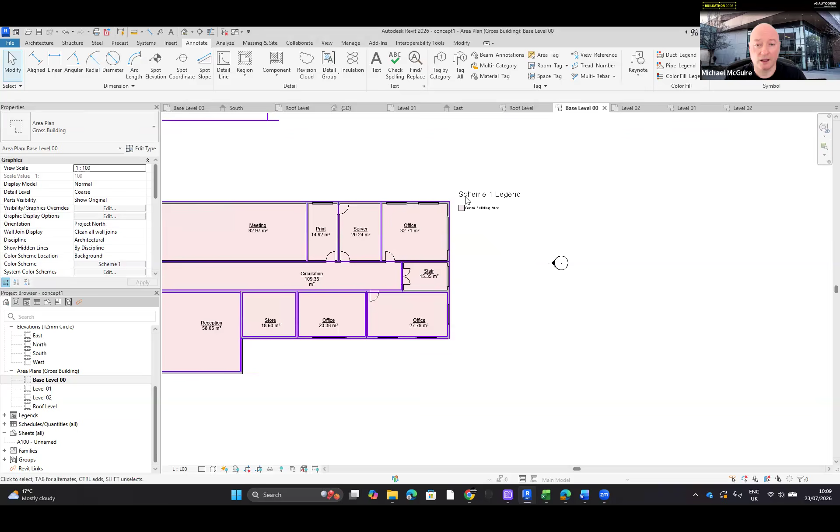But you can also change this. So if we select it, you see what happens up here? So if we select this, we can edit it. Okay, so we have all up in here.

Instead of area type, let's change it by area name. Now, default is fine. Let's just say OK to that. We don't need to check it for color blindness or anything. We'll accept it as default. You can say OK to that, and you will get all of the names defining the color of the space.

So stairs are the same color, meeting. This is why I called it a meeting room and not meeting 1, meeting 2, and so on. And you can start to see what all of the colors or all of the defined spaces might be like.

It's a little bit over the top because you can already see the names, but for presentation purposes, you might want to not see all of the names here along with the areas. You might want to show that in one, you might want to show it in another without that, and you can try, if you see what I'm doing here, is you can start to switch these names off, so you use the color and the legend, right? So depending on what you prefer aesthetically, you can click each of the tags.

So the tag is the text, okay, not this here, that's the actual area. The little crisscross itself is the area. So holding Control, I can pick all of them, or you can pick one and again use that exact same tool we used multiple times now. Pick all of them, and then down in the bottom of your screen you have a little pair of glasses, and you can say to either hide the element, that's everything you've selected, or the category. If you want to hide a wall or all of the walls, for example, the one you've selected or all of them. So we'll just say hide element and they all disappear.

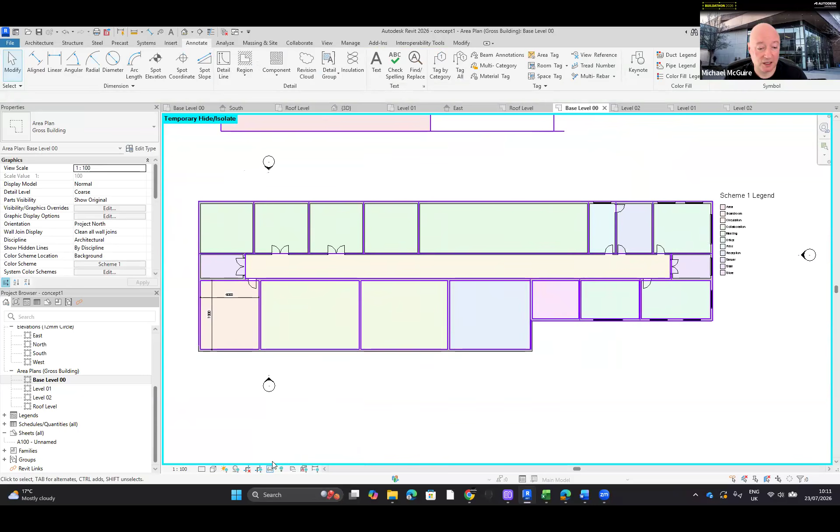Okay, so you might like how that looks in terms of aesthetics. To bring them back, click the glasses and just say reset and they all come back again. So entirely up to you in terms of aesthetics.

What do you prefer? What works for you? What looks better? Is it too busy? Does it give the information you need? And so on. Okay, so pretty much in terms of Revit and area plans, etc., that would cover that.

So before we move to Forma, does anybody have any questions? Feel free to put them in the chat. I'll just wait a little second, or we'll see how we deal with that. If not, then what we'll look at is what does the team do next and how do we then move to Forma with that. All good? Perfect.

So let's have a look then at next steps. So you can then see what the ground would look like, the first floor, the second floor, and so on, right, as we kind of work through that. What you want to then do is take notes of these sizes, and somebody has to then recreate these in

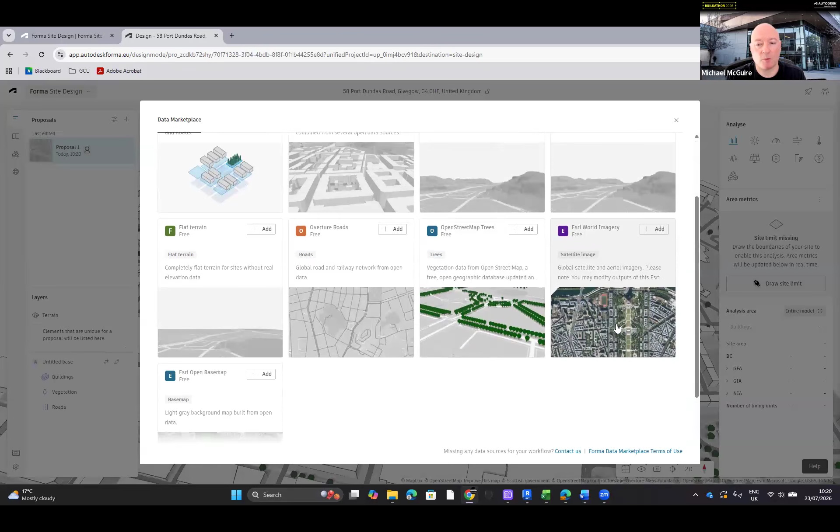And you'll see it keeps returning back to here for me. Also if you want, there is the satellite image - do you want to look at what it kind of looks like from above? If you want to look from a Google Maps or Apple Maps or something like that, you can add these in also. When you're done, click close up here.

And there is going to be my default that I'm going to use this multiple times for multiple concepts, but I want to define where is my site and what already sits there, for example. I know that this building sits there currently. I'm going to propose that it gets removed.

So if you click on it, you'll see it goes purple. If you double click on it, it opens it for editing, and you can click the delete key, and then we'll try the other buildings also - any of these that we don't want in the site. I'm going to zoom in and see up here, click on that and delete that also. So double click opens this little edit window to edit the base.

And when you're done, you can click done. Now we have an empty plot that I can work in. I want to define that this is my site that I want to work in. And once I've defined it as my site, I might make multiple duplicate copies so that I only need to do this once.

It's going to be the same site for every concept. The concept might sit up here, the concept might sit down here or around here. How might it be affected by the different buildings on the site, the different conditions on the site, the noise level, etc. So we have the site limit in these tools, our create buildings, terrain pads and tree lines, etc.

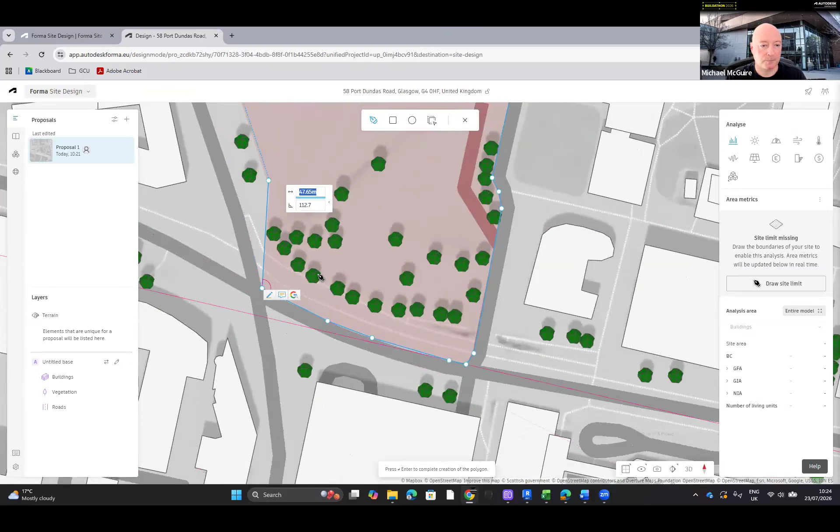And then along to this space. And then what you'll notice is when I click again in that first point, you see it's still trying to go. When I click in the first position, it defines the site. So now the site is red and defined as my actual site.

Why is that useful? When we do some analysis, we can ask it to analyze the entire model, or we can ask it to analyze only on the site itself. That can take longer if we want to analyze the whole model versus just the site itself.

So we've got proposal 1 that's there, as this is kind of called. We can look to rename that. So the 3 dots that are there, we can choose to rename, and we can just call this site. So this would be the site defined, for example.

Which means if I click the 3 dots, we can choose duplicate, and it comes along with the site. And for that, we can rename it as concept 1. And then if we duplicate that, we might want to rename that concept 2 or concept 1, 2. Maybe it's a minor change that we make, for example, maybe we just move it on the site, something like that.

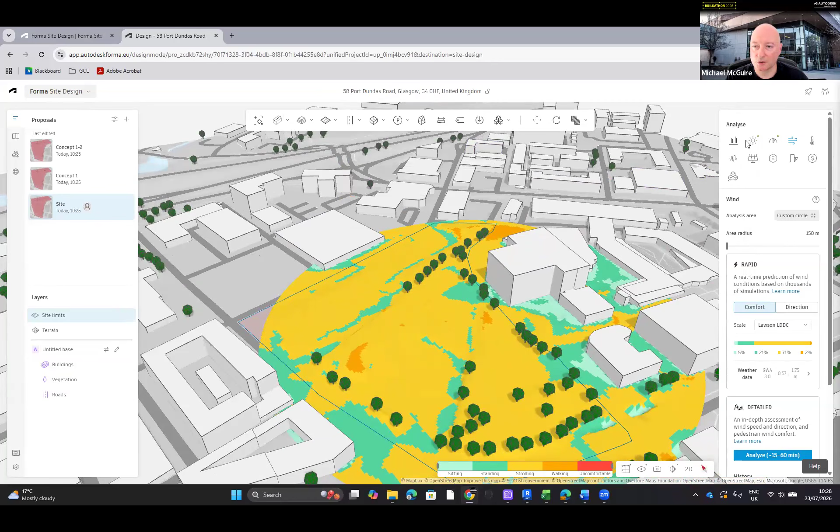Okay, so let's look at the sun analysis, view the results, sun hours. So what's your thoughts? What would you like to do with your design? Are you currently in a country that's really, really warm and you would like to protect from the sun?

What we can do is use these inspect tools and select various points on the site, and check currently which areas are getting the least or the most amount of sun. You can use that to help you decide which part of the site you might want to use.

And also we can think about how the sun rises. So if it rises and we have a building here, maybe this existing building is not going to allow us to get the early morning light. Is that an issue? We get the sunlight in the afternoon and nothing really blocks it until it sets in the evening. Okay - should this building be much higher, then maybe that would also block it in the afternoon, for example.

Okay, so view results we can look at. We don't have a building, so we don't know the sun daylight potential, but we can kind of guess from some of the other buildings that are there - the potential, looking at how much or how little sun they're going to get. This L-shape of a building might cause a lot of reduction in the amount of light that we get.

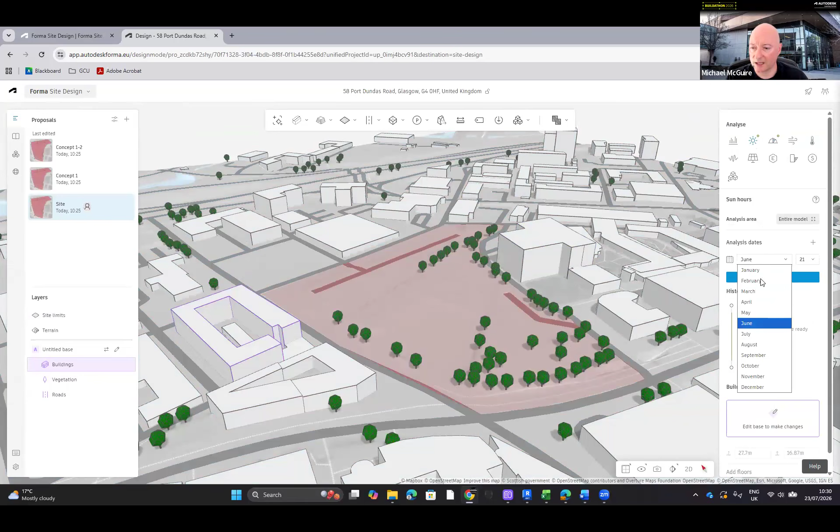So looking at things like that - what happens, we did the 23rd of July both times. So what happens if we did January 21st instead? Oh yeah, of course - so the analysis actually wasn't for the 23rd of July.

The analysis date showed was because I ran it on the 23rd of July - it wasn't that date. So actually, if I go and look at the results, we're going to find this was the January one. There we go - so there's what we're getting for the amount of light now in January in Scotland.

So if you're not from Scotland or the UK, you might be surprised to learn that we don't get an awful lot of sunlight in the winter - it's quite late sunrise and quite early sunset. So how might that affect your building? Thinking of the summer where you thought this was a great place to position the building, maybe you only get 30 minutes of direct sun because the sun stays very low and this building that's here is going to impact it.

You see, it gets 6 hours, but actually it's going to impact my building if I locate it here. So there's a lot of that to take into mind. Okay, thinking of that, I'm thinking this area out here looks quite good. What I might try and do, since I do know this area...

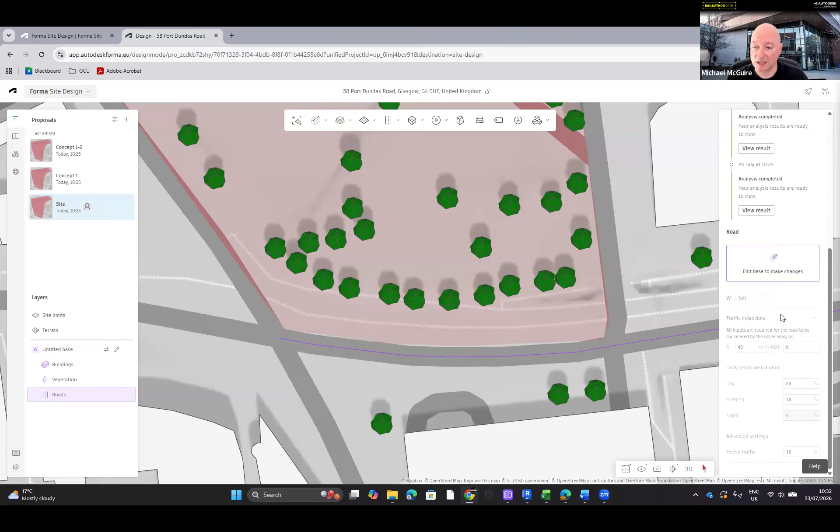I'm going to start picking up some of the roads. We can cancel these out and start to look at the roads. Because we loaded the roads in, this little line is only for this one little stretch of road, so you might want to pick up multiples of them, including these as well. Once you pick up this little line, you can go down to here and edit to make changes.

I'll do this again for some of the others, but you can determine what the speed is on this road. If we think this is 40 kilometers an hour, then what's the average daily traffic? This is a really busy road. So if I said something like 10,000 cars, 84% of them are in the day, 10% in the early evening, and maybe 6% at night.

And then we've got the advanced settings, where sometimes at peaks we've got a little bit heavier traffic. That will populate when I ask it to generate noise, and it will tell me that's a lot of car noise, right? We can do the same thing for others.

If I select done, that shows how we initiated that by picking one of these roads up. I'm going to have to do all of the roads around the site that are used. So if I pick this one up, the first time you have to click edit base to make changes, and then you can populate this here.

So that road is 40 kilometers an hour, maybe 5,000 or 6,000 cars travel along this road, and I need to populate the same fields: 40 kilometers an hour, 5,000 cars and so on. Populating all of these, this little road here is a really small driveway with maybe only 1,000 cars.

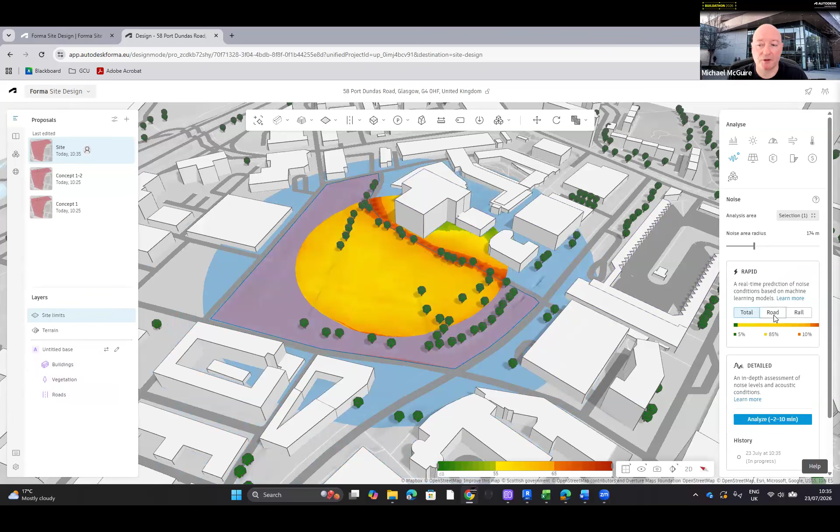This is our quick analysis, remember, in the custom circle. We can set it to the site limit if we'd like it to cover the entire site, and then do everything that's road and rail. We don't have any rail - maybe you do - but road, rail, total, then do your analysis for that and see what your results are.

Looking at your results together, we saw this area was the darkest area, and it might help. You found this was the best area out here, but actually now we've added the road noise, up here to the north of the site might not be super good. These are currently in progress, so we can wait and see what they look like.

But I'm also imagining down and around here is not good because it's the main road - it's a very busy road with a lot of traffic going really fast. So I imagine there's going to be a lot of road noise in this area here, and what you can do is look at the results of these.

Once we put our buildings in, we'll get to see that. Again, we can inspect and see, yep, 65 decibels near the front of that. It's reducing to only 63. So maybe we want to be quite far away from this road that's here. We definitely want to be quite far away from this road down here. This is the really noisy end of the road.

So hopefully that makes sense in terms of how we're using that as a kind of benchmark analysis. How might that work, for example? So we go back to wind. It should give us that. Yeah.

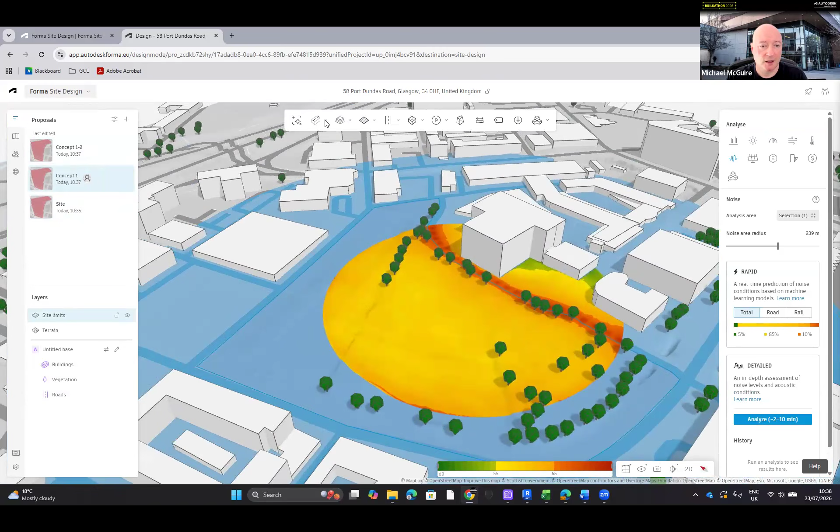I would like to redraw my building, so we can do that in 3D. I'll let you have a look at the different types that are there. So we have this kind of a line building, or a more basic building, if you have that straight box. If you manage to get a building that looked a bit like this, then you're welcome to use that line building. We'll take it away just now and show you. So we've got line building.

Again, maybe we want to see it in 2D, maybe in north to south. We might want to use this area up here. You know the size of your building, maybe you want it running parallel to this road that's up here. So we said something like 60 meters. If you manage to create a building that is 60 meters in your concept exactly, we can come back to here.

You can see, using this building, that it is 12 meters wide. Okay, maybe you're 20 meters wide. We should have 3 stories instead of 4, so here I'm going to change this to 3, and you'll see that it's updating each time. So you just recreate your concept exactly as is. This is not mine, I'm going to show you how I would do mine in a little minute.

Each of the floor levels might be 3 meters or 4 meters in between. And then just something that's there to divide up the building, the sections are 16 meters each, and then the last one obviously is not 16 meters, it's only making it up to 60 meters. So if you manage to create a building that is perfectly rectangular in footprint, a cuboid building, this is great for you. If you only manage that for one floor, then yeah, you can make it just one floor.

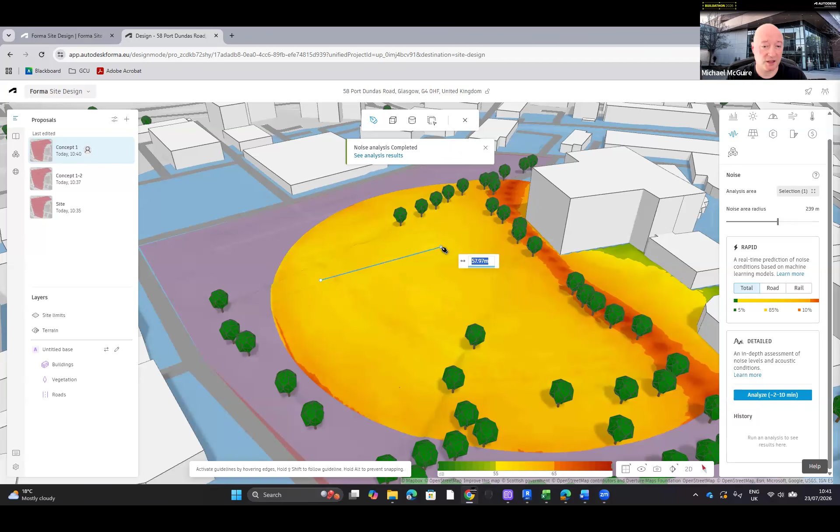Okay, so once we start to draw, this is why sometimes I like to do this part in 2D. I'll show you why, but if we start to create something like around about 60 meters, we can type in 60 and it's now locked to 60 meters, but I have no idea how this sits on the site. Is it perfectly level? So we'll do it again, we'll do it in plan view, but let's try, okay?

So we click, and now I can start to draw the other face. So I know that my building was a bit stepped, right? So it was something like 20 meters, and you'll see in this corner up here, it's going to give me a 90 degrees symbol. I can click, then I can start to go this way for 20 meters. So by typing in 20, it locks it into place.

And then I think it was something like 15 meters, right? Yeah, 15 meters. And then we can draw along this axis to here. So what that's showing me is that it's locked 90 degrees to this, and that corner to here. Exactly the same as with the site, if I click on the original point, that's got my building footprint.

Exactly like the concept that I created, okay? And I'm going to draw, for me, 1 story. If you remember, my building was only 1 story high at ground level. So there's the reception area, the boardroom, the collaborative space, some of the meeting rooms, the staircases, however that might be shaped. And then I want to try the same thing for the second floor.

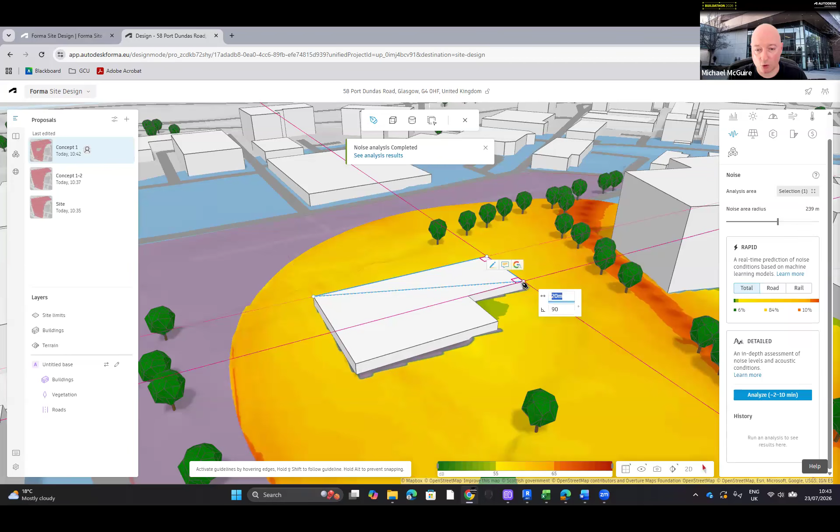So we are looking at the same tool. Basic building, and I can draw on the top. You'll notice it snaps to the top of the building. I forget, I think we had it - let's just simplify this and say it was that size. Okay, so something like that for my second floor.

And my third floor was, if we do the same thing again, it all started in the same corner. Yeah, maybe 30 meters or so, something like that. And clicking in the start again is what defines that for me. So there might be my concept 1, sitting on the site - that might be my concept 1.

And then I've got to think about analysing that. So in the analysis tools, we can start to look at now, what are the sun hours analysis? And again, I might try January 1st and run the analysis. Okay, then we can come back to that. So it's in progress. What about a daylight analysis?

Okay, so we can start to look at what that might be. We can run the analysis, not the selection - we do the entire model. Run analysis, and then wind.

So we want to pick up, yeah, something like that. What you'll notice now though is as it's doing a quick wind analysis, that's fine. If we are now to do the wind analysis detailed, it's going to take 30 to 135 minutes because we're telling it to take into account the entire model.

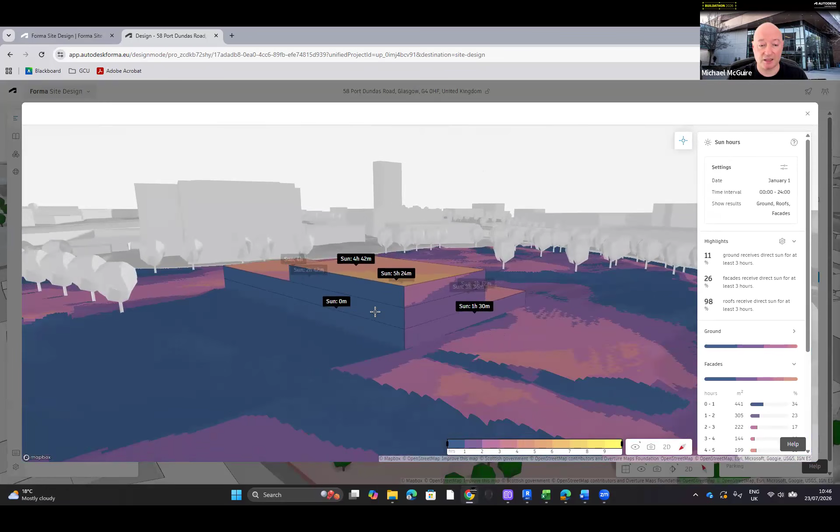So this is January. It doesn't look super inviting, does it, in January? But it's probably the most that we can achieve. How do we prove that? By using the inspect tool. So we're not getting a lot of sun in some of these areas, like 0 on the north. That's to be expected - the sun sets about here, so we're not going to get an awful lot.

But using the inspect tool, you can then record how much sun you're achieving on your building at different phases, right? So when you do concept 2 - it might sit, or concept 1.2 might be the same building on a different part of the site. Currently, I'm thinking this is pretty good.

We've got the reception here. The reception is not in the north, which would be getting 0 sunlight, 0 minutes. So I'm thinking the reception, it's a lot more welcoming here. If you were to think about a car park, maybe the car park might be in this space around here, that type of thing.

Please pay attention to these on the right-hand side. So while you've got these showing and telling me with the inspect tool how much you get, we get to see other things here as judges as well. So the ground receives like 11%, the facade receives 26%, the roof gets 98% of all the sunlight for at least 3 hours.

And then if you have another concept, which one are you selecting? Are you selecting the concept that gets the most amount of sunlight, daylight, or the least? And then justify why that might be. Are you in a part of the world where you try and limit the amount of direct sunlight, for example?

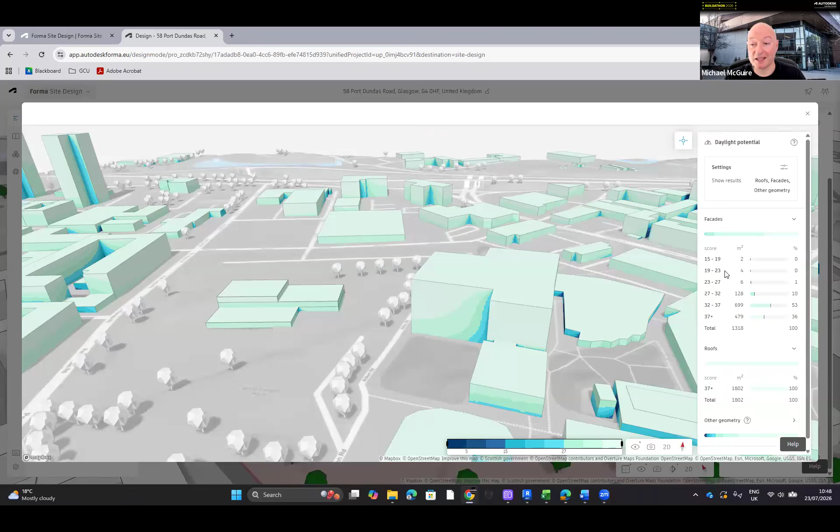Unless you're trying to block the amount of light that's coming in, for example. So again, going back to if you're in a really warm, sunny climate, are you trying natural solar shading? If so, you need to be aware that lower numbers are better for you. And then explain why as well.

Okay, so if we pick these up, we can click inspect and then pick each of these spaces, again thinking about what the scores are around about reception. What do we see? So we're getting less daylight in reception. So maybe, should reception be moved further along? Do you use this as a reason to speak to your teammate that's in Revit and ask them to move the reception to here or here?

Okay, what happens if you move that space? What happens to the concept? The shape has remained the same if you replace it with a room that's the same size. So maybe it's just location that's changing, so you need to update your area plan. But don't disregard your first area plan. Keep that because you want to show that you used Forma to impact the design.

Okay, so if you look at this and think there's not a lot of daylight here, maybe we don't want the reception to be in this corner, maybe we want to move the reception to here, then what space are you going to put here? Is it a storeroom? Is it the stairwell? Is it some space that doesn't necessarily need a lot of light?

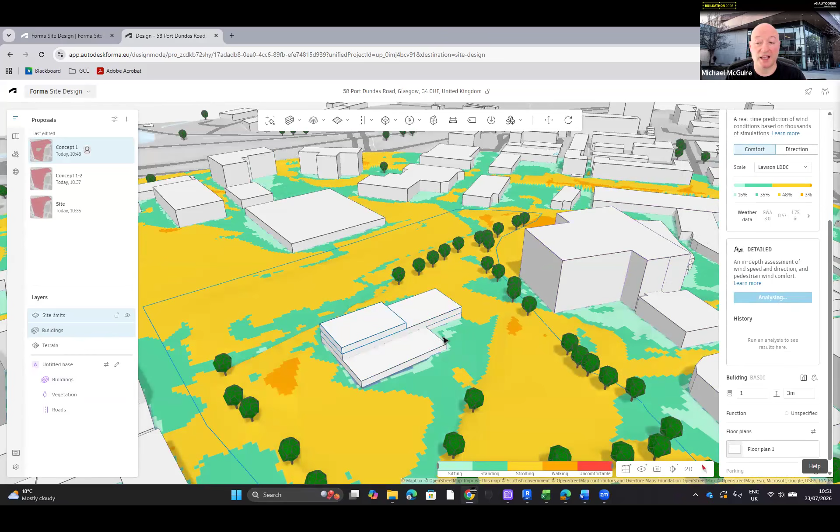Okay, and then we have our wind analysis. It's given as a rough wind analysis. We can run a full analysis, but it's going to take half an hour. So even if we clicked it to start it, we can come back in half an hour and see what the wind analysis is doing.

Okay, but we have some really nice, comfortable spaces here. So looking at the legend, these are comfortable for sitting. Then we have standing and strolling. There's nothing that I see. We've got some walking here. So as long as you're walking, you don't find the wind speed uncomfortable. There's nothing on this site that seems to be uncomfortable winds.

A detailed analysis will show us which direction they're coming from and how we might protect against them. But actually, this is showing us a really nice area. If you wanted to go further with your Revit model, with your design, and talk about this is the area where you would position seating, you can back that up. You can support that with a screen capture of this image, right?

So here, lots of seating, absolutely. Along here, maybe some seating. Over here, definitely not seating. And then around here, there are some trees, so standing seems okay, maybe sitting or standing around the trees. Maybe this is the walkway we use up and into the campus.

Okay, all coming from our outcomes from the analysis. So it's not just a guess. We've put the building here and we think this is the best place where we would position something or access the site, whatever that might be.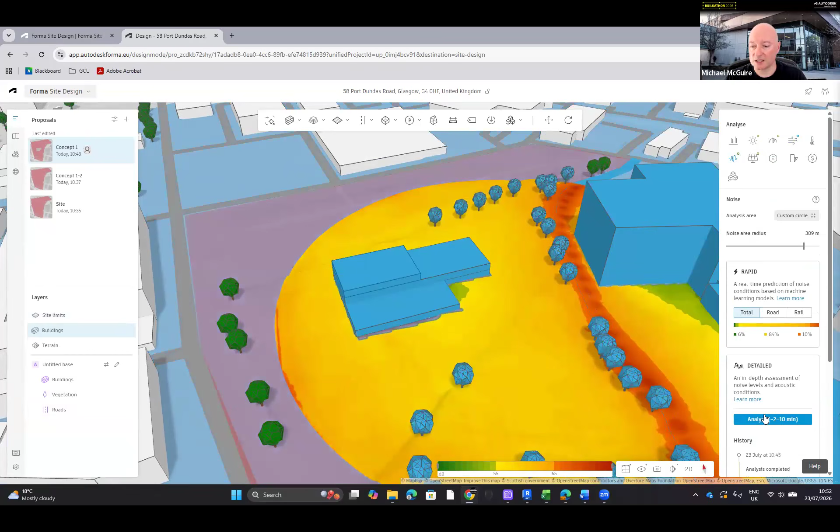Okay, how's noise? Let's have a look at the noise analysis. It's looking okay. This is a main road, we spoke about this. So we have something like 73 decibels here, that's quite noisy. We have something like 70 decibels here, that's quite noisy. How is that impacting your building?

Here, 60 decibels. What you'll notice is here on the site, maybe this way, we've got 50 decibels, and 56 decibels on the site. So maybe this would be a good orientation for the building.

But what happens to solar? What happens to sun? What happens to wind? What happens to daylight? So that might be what I would like to try as concept 2.

So we have a boardroom here, right? The boardroom is getting around about 60 decibels of noise level. Is that loud? I don't know. So Google it, go and search what is 60 decibels of sound? How much sound might that be versus 50? So it's 59. It doesn't say it's uncomfortable, but it's definitely not on the lower end of the yellows or greens. So what might that be?

Okay, so is that workable for a boardroom? Is that too noisy for a boardroom? We have the same up here, 61 decibels. What did we say was going to go here? Might that be a good position for staircases, the lifts, the toilets? So then you therefore have a buffer, where the noisy rooms that you would expect might go on this side, and then the quieter rooms might go on this side.

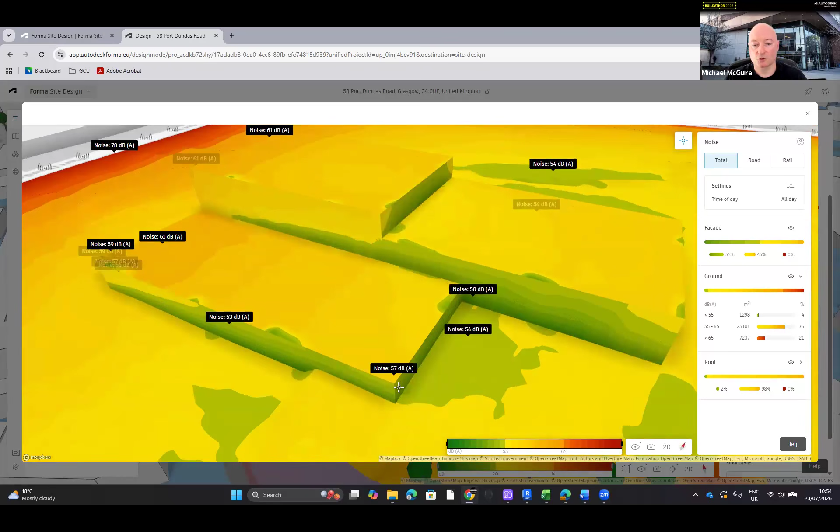So might the boardroom be better positioned here? And there, what position would you, or which rooms would you then locate and position here? Okay, so justifying everything gives the judges an opportunity to look at your design, but also how you've interrogated that design. Okay, how have you then shaped your design?

So if we look at photovoltaic, the solar panels, you might be told that the coverage is more like 80%, the panel efficiency might be 20%, or look to the brief and see whatever you're being told. It's only for roofs, we haven't put any solar panels on any of the faces of the buildings. But what we can start to look at is what happens to the kilowatt hours per meter squared, because we've stepped the building up, we've obviously got some shadow.

You'll also have what is your average total solar energy. And obviously, as we start to do that, when you do your analysis, if you set them early before you run the analysis, you can then go in and check what's your total going to be. Okay? Kilowatt hours, this is the number, 287 million kilowatt hours. So for this concept, okay? So if I'm taking a screenshot of this, I'm making sure that that is in the screenshot. So I've got 287 million kilowatt hours.

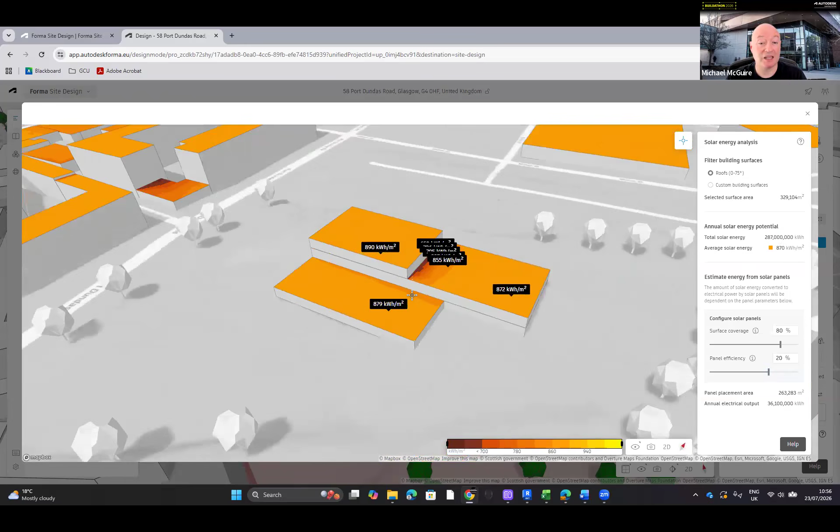So what does that mean in terms of my concept? Can I improve it? Okay, so how might I improve it? We might look at concept 2. Okay, so concept 1, we know, it will remain. Concept 2, if I open that and go to concept 1, 2, maybe it's the same building sitting in a slightly different place.

I'll just do something, let's do what I was saying earlier. Let's do, so we're in 2D, looking straight down. We've got north-south activated. So I would like my building actually to sit, I'm going to pick down to here. Yeah, we'll pick about here. So I'm just going to do a rough concept this time. So something like this, I think it looks too big actually, but yeah, let's go with this. I'll just do it as 2-story this time.

So we have the building actually sitting into the terrain, as we can see. That will impact that. Okay, so maybe there's a foundation level or something to it. We'll say 1 meter. Okay, so you'll notice in this floor I'm making it 1 meter, so it's like a foundation level just to set up the story of the building. So we've got 2 stories sitting up in here.

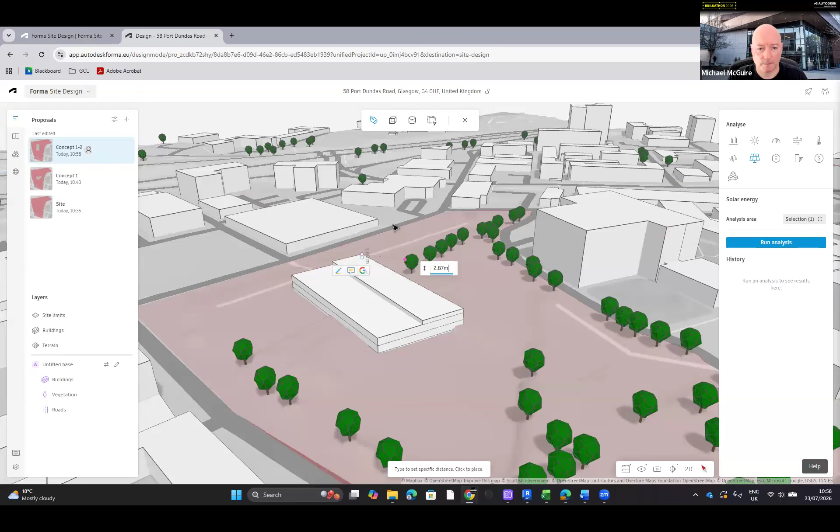One story, yeah, so it's a totally different concept, okay? It doesn't need to be for this concept, it could be this concept that's here rotated 90 degrees. I'd like to just go and do something completely different and see how it actually impacts everything on the site.

Okay, so I have my analysis to do again. So sun analysis, pick the best day, pick the worst day. So again, it was like January 2nd I think we did. Run the analysis, daylight, we want to run that analysis. Just be aware of how it's set, if it's going to be set to the entire model. This one was entire model.

The wind, site limit. The noise, again we've got selection, we want site limit. And the solar analysis, entire model. So just make sure you're running the same tests. So if you've got entire model done for concept 1, then run analysis for entire model for concept 2 as well, and so on and so on.

And I might then also pick up, so we'll do like July, 21st of July, we'll just do that. So run analysis, so I've got a comparison for a really sunny day versus a not so sunny day. Okay, so we did get this one.

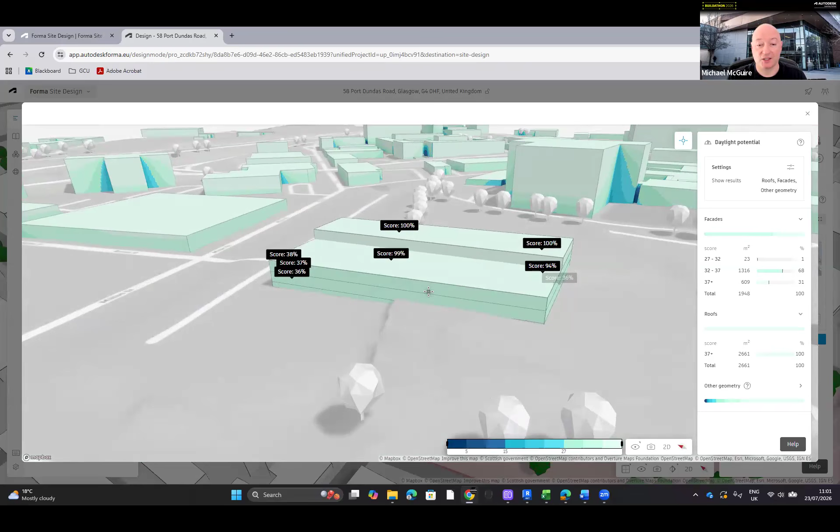So are you then saying that that's a better design? I appreciate we're getting much higher scores because this is a much bigger building, it's too big. I appreciate it's too big, but it lets you see the facade, the number of the facade that's getting these higher scores. So even if we made it a smaller building, the scores are really, really high.

Okay, what happens to wind? So we start to look at that quick analysis for the wind. Yep, there we go. And immediately I'm going to notice something: there is not so many spaces for positioning benches and seating that are comfortable for sitting position.

So maybe around about this space here. As I said, we'd still need to do like a long-term analysis, a more detailed analysis on that. But it's looking like for the wind, this is not as good if you want to position seating outside.

Okay, however, that gives you another advantage. If the wind is reduced enough that it's no wind and it's really comfortable to sit here, what that does is it reduces the wind on the facade of the building, if you would like to talk about natural ventilation. So if you want to use air conditioning, you don't need wind. If you want to use natural ventilation, opening windows and doors or ventilation through the air vents, then you don't actually want to surround your building with no wind.

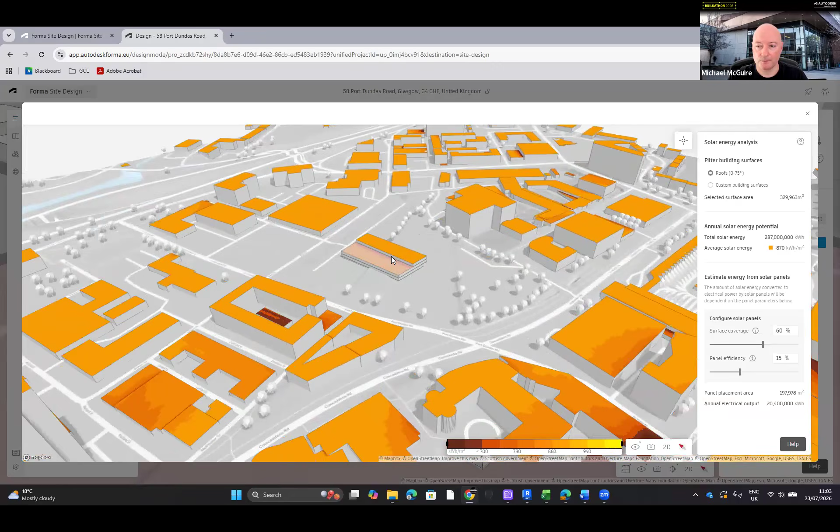What we need to do first of all might be inspect, and we can see what areas are producing the best, or where might we not put solar panels. We might not put them here. So that might only be 60% of the roof that's covered. We still might use 15% efficient panels.

But when you run your analysis, maybe pick site limit. Okay, so this time if I do the analysis, I'm going to get my building only. So my building, I can then check what does my building generate in kilowatt hours over the entire year, and then compare that directly to concept one.

Okay, oh, it's stopped, so we can try again. Run the analysis. Yeah, we'll see if that runs.

That can also work if you want to look at things like your daylight potential and so on. Make sure that if you want to see the entirety of the site, everything that is surrounding, you want to pick up the entire model. If you don't want that and you want to look at just your model, then you pick in here, we'll do site limit. Okay, and it will say selection here. We can close that. So when we run the analysis, it begins the analysis, in progress, that's good, and we'll get just this building, not everything else.

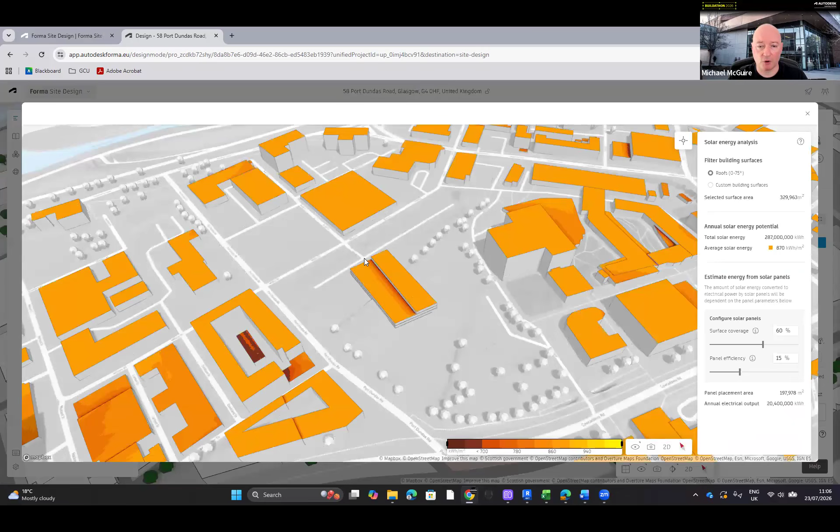So it should pick it up. Yeah, so it's not picking it up right now. Don't know why, let's see. The one earlier was everything, right? Yep, we've got all of it. We want to deselect that. It should just be, if we do entire model, we get everything. If we do site limit, it should be picking this up. Let's try it as we'll stick a line building in and see if it picks up the building itself.

Run the analysis. We'll see if it picks that one up. It might just be how I created the concept. Other than that, we will have a concept one, we'll have a concept two. It's your opportunity to go back and look at the Revit model. So if you think this concept, something more like this might work, let's go back.

Analysis completed. Yeah, it picked them up this time. So now what I might do is just delete this one and then rerun the analysis, because I'm going to get a fake number. So now if we just run the analysis, there we go. No idea why that didn't work, but we've fixed it.

And all I did was create a new building and run it and then just delete that building, but let's see if it works. So in progress right now, this is going to be really beneficial for me deciding which concept I want to go forward with. Yeah, so I've got, from this building only, you'll notice none of the other buildings are lit up orange, so it's only this building, total energy, 2,310,000 kilowatt hours. Okay, so how might that compare? So 2.3 million, we can go to the other concept.

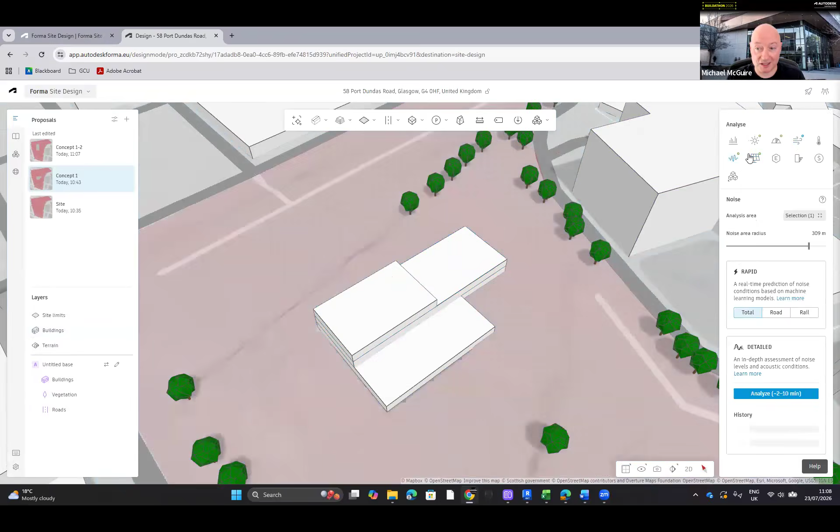How did it score in sun hours analysis? How did it score in daylight potential? How did it score in wind? So you have to argue for all of these. You can't get the best building in the world scoring all of these. You might get the best sun hours and solar photovoltaic energy, but it might be terrible for wind. It might be terrible for noise. Maybe you get the best noise cancelling area of the site, but it doesn't give you the most amount of sun, for example. And then the scope all repeats again.

So you would then go back to Revit, and File, New, create a different concept. So this concept can work as concept 1 and concept 1.2, because it's maybe just the same concept sitting on the site a different way. Maybe it sits like we discussed.

Maybe it sits here. If we rotate that, maybe if we just do it as a line building, maybe this was my concept and it sits here. Maybe this was my concept and it sits here. Let's pick it up again. This was my concept and it sits here, or this could have been my concept and it sits here. Okay, that's the same concept, that would be concept 1. So concept 1.1, 1.2, 1.3, 1.4, it's the same concept, the same arrangement of spaces, it just sits on different parts of the site. And here you would have concept 1.1, 1.2, 1.3, 1.4, because it's the same concept.

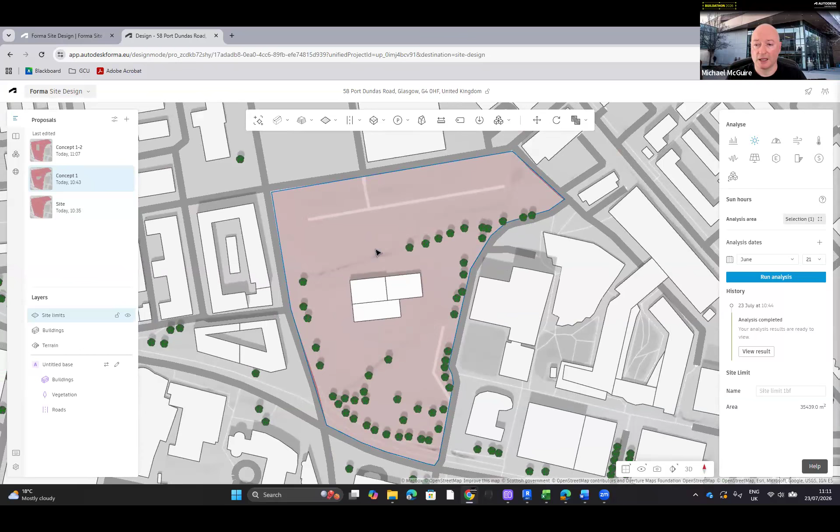This is then concept 2. You can duplicate the site and call it concept 2, concept 2.1, 2.2, 2.3, and so on. So that is the entire process all the way through, and then you are going to compare each and decide how best to present that.

Through screenshots, you will get more information on how to submit that—if it's a poster, PowerPoint, or a document, however you do that. Then you print everything off as one combined PDF document where you show all of your concepts as best you can, showing the areas and the entirety of the area, showing that it is the size it's meant to be.

You might want to look at the 3D if you create that in Revit. We spoke already about how you might want to pick up all of the walls. Do you prefer how it looks when it looks like this, for example? So think about presentation, what it might look like, what you might display. Do you want to display the ground floor plans, or the ground area plan? The area plan might sit at one part and beside it a 3D which communicates the building, and then that goes to Forma site design.

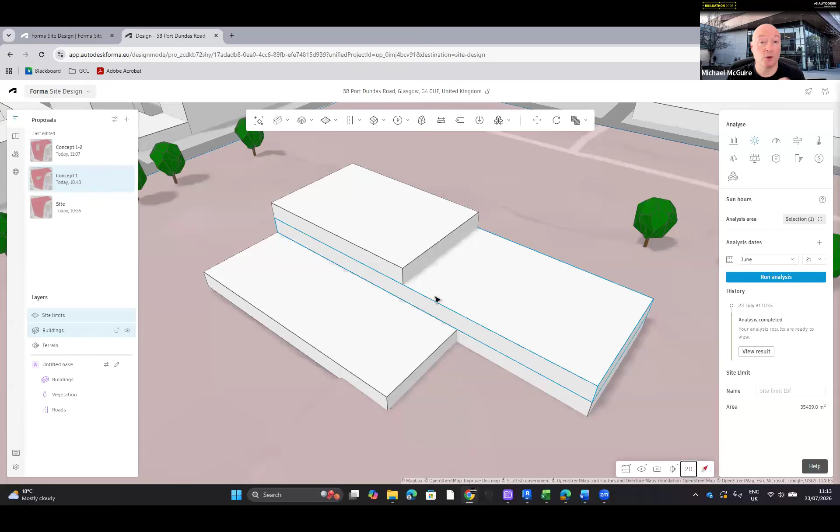And then in Forma site design is your analysis. There really is a lot to be earned by showing that you can come in here and evaluate a concept and then go back to Revit and change your concept—change some spaces, change the orientation, or change some of the rooms down here you might feel deserve to be in the upper level, wherever that might be. This was reception, we saw that. What if it's too noisy? What if it's too dark? Show that you were able to use Forma site design to actually influence or get to the best design.

So start to think how you can use Forma site design to actually design the building. So this is the first concept, that's great—how has Forma shaped that to change? So concept 1 becomes concept 1.2 and 1.3. Concept 2 is entirely different, something completely new, but how does that change? So what's concept 2.2 and concept 2.3? What does that look like? Was it shaped because of the results from here?

And show all of them. Don't be scared to put them all in. If it's a poster, Word, PowerPoint, whatever it is, you're going to PDF the whole thing anyway. You'll be rewarded for putting in even the terrible ones that you think did terribly. Put it in and show the results and why you then didn't use it to go forward.

Okay, so that's the tutorial part over. What I wondered was, are there any questions at this point, clarifications? Is there anything that anybody wants to see specifically again?

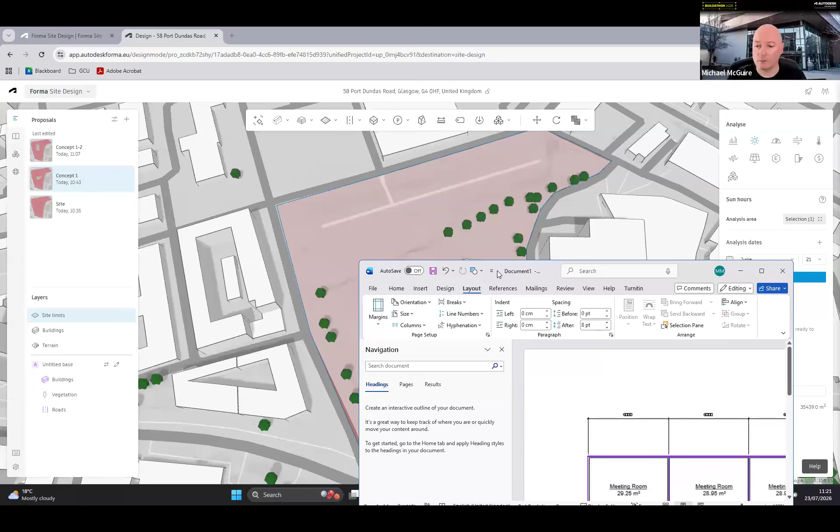Why do we create different levels before modeling? Why do we create different levels? Do you mean the spreadsheet? This was just my guess. So if I share that again and show you how I attempt it - this doesn't mean you need to attempt it in the same way. Wrong one, let's grab this.

So what I was trying to do here was maybe set myself a limit of 600 square meters. Maybe I change it, maybe I make it 400 and try again with 400.

If I've got 600 square meters of a boundary limit, I'm trying to see which spaces I can get in different levels. So ground floor, all of them are going to have stairs, right? The ground floor for me would also have reception. So what I want to do is grab all of this and move it down to the ground floor, for example, so the reception should be there.

I would also argue that the plant room should be on the ground floor. It's got a boiler, it's got very heavy equipment. It doesn't need to be there though, it can be located elsewhere, the plant room. So that's entirely up to you.

But I've tried it this way to give me some understanding of how much space I'm going to need. So if I've said one breakout room, maybe 49 meters squared, 7 by 7, 5 meeting rooms, or maybe the next time I'll say only 3. So in here I'm going to say 3 meeting rooms, 30 meters each, so I need 90 meters, right?

Maybe I can fit all of them on the ground floor, maybe I can't. So I might end up saying I'll have 2 here and then add 1 to the top floor, so I've got 1 up there, that type of thing. This is just me in my own way trying to design which spaces would take up the most amount of space in each of the various levels.

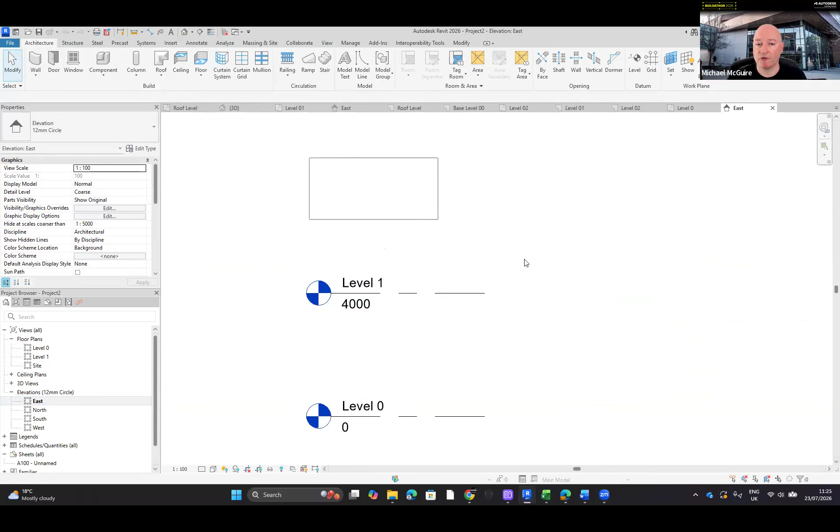So the first thing I then did was these levels, right? Yeah, so we had level 0, we had level 1. You can't create up to the roof level because it doesn't exist. Okay, so if you remember, level 0 and level 1 exist. I called them base level 00, accept all the prompts and it renames it.

Level 01, yes, and then I created along here the levels themselves. So the reason I'm creating - I'll show you - if I create this, what I haven't done is the roof level, right? If I start to draw, here I can connect from ground to level 1, great, that's perfect, so I could create that. When I go to level 1, I can create walls up to level 2, that's perfect.

Okay, so maybe I do this. These don't fit, but there's level 2.

What I can't then do is, as we go up to it, is where did that go? It went to level 2. I don't have a level 2 here because it's black and white.

So if we add that, and these are all in the steps from the very beginning, we can add that to the view. And if I then try and draw another level, I can't tell it to pick the roof level because it doesn't exist. So that's why you create all of those levels first. Before you start to model, before you start to draw, you should have level 0, 1, 2, roof, 1, 2, 3, 4, 5, 6, 7, roof, whatever you're actually allowed to have in the brief, and you can experiment with these yourself.